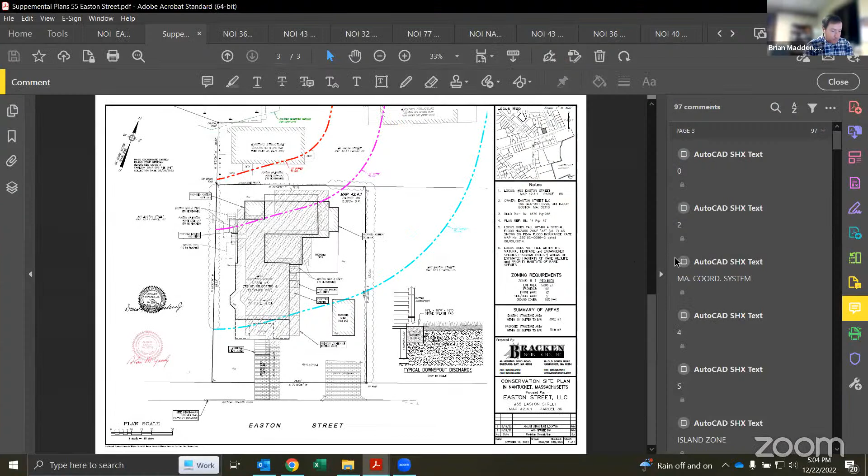We have Easton Street LLC at 55 Easton Street, represented by Brian Madden. Thank you very much, for the record, Brian Madden from LEC. At the last meeting, we discussed the proposed project that involved raising and relocating the existing dwelling with some improvements on the subject parcel located within the flood zone.

There's also that isolated vegetated wetland to the north that's separated from the site itself by an off-site structure, also enclosed with stockade fence and a patio area. We had submitted a photograph just to show what that looks like between the existing deck on site and looking towards the wetland. So pretty heavily developed conditions between the site and the wetland. The wetland itself is occupied by invasive Phragmites, bush honeysuckle, and bittersweet, surrounded by existing development.

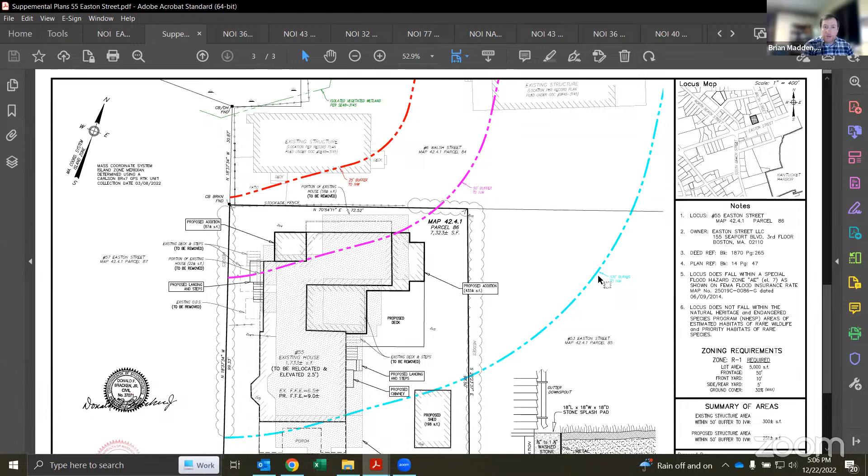But as requested by the commission, we did provide some clarification on the reduction of the structural footprint within the 50-foot buffer. There's a total of 49 square feet being reduced within the 50-foot buffer zone, in addition to an increase in the wetland separation setback to that offsite wetland. So that, coupled with the reconstruction of the dwelling that's going to be elevated in compliance with state and local building codes to improve the flood zone interests, we believe the project will result in an improvement over existing conditions. I'll turn it over to questions. Thank you, Brian.

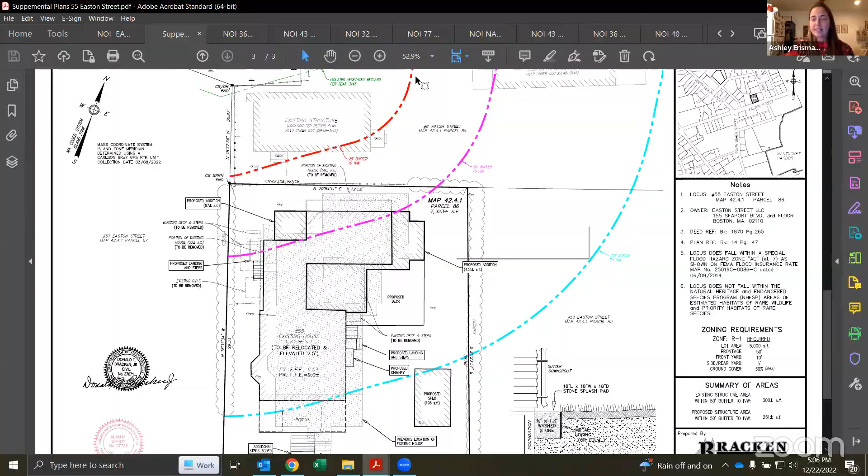Once the screen share's off, I'll hopefully be able to see if any commissioners have questions or comments. So again, any questions or comments? Mark?

Thank you, Ashley. Brian, am I reading it correctly? There's a substantial amount of construction within the 25 to 50-foot buffer? There's existing developed conditions that are off-site, yes.

But you're doing nothing within 25 to 50 feet for new construction? Well, we're shifting the house further away from the wetland within the 50-foot minimally. There's some proposed redevelopment in that outer 50-foot, but that's all previously developed conditions. Again, we're moving the structure further away, closer towards Easton Street, to reduce that structural footprint in the 50.

Well, to be blunt, Brian, you didn't move it far enough away to my liking. Well, again, just to reiterate, there's heavily developed conditions in between the site and the wetland with the existing structure, surrounded by stockade fence and patios.

And I think shifting it closer towards Easton Street, you run into HDC issues, amongst other concerns. But again, I think the project is a vast improvement over existing conditions, from a flood zone perspective, and also increasing the wetland setbacks and structural reduction.

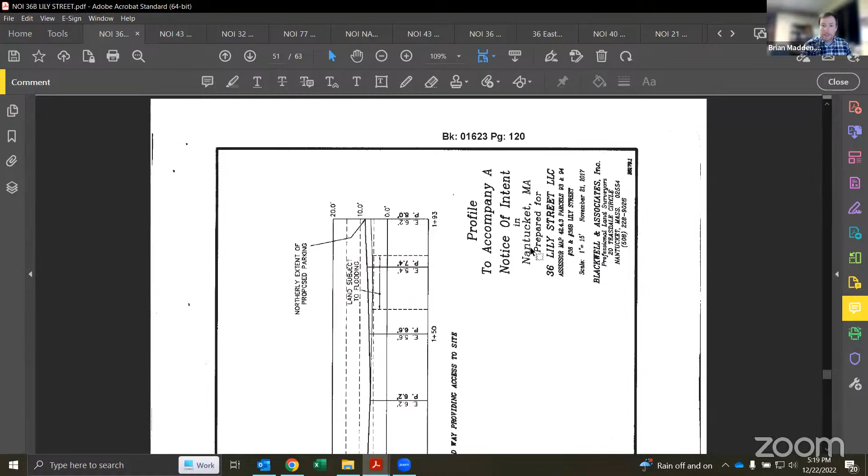I'll let Will pull up the new plan. This is the older original plan. I may have the wrong one up, but give me... I can share my screen if that's easy. Brian, why don't you share your screen if you have it? Yep. All right. Thank you.

All right, everyone see that? Yes, we can see that. All right, excellent. So based on the commissioner feedback we got at the last meeting, we've made several revisions, essentially eliminating the proposed structure within the 50-foot buffer zone to the vegetated wetlands to the west.

That results in a net decrease of 74 square feet of structure that's currently within the 50-foot buffer zone. If you remember, originally we had 121 square feet of structure proposed in the 50, which resulted in a net increase of 47 square feet. So with the revision outside the 50-foot, we have a net decrease of 74 square feet.

The size of the proposed main dwelling has been reduced in total by 202 square feet. We eliminated the gravel surface driveway turnout area that extended into the land subject to flooding. Again, that's a local land subject to flooding, not within a FEMA flood zone. We eliminated the gravel aspect, and per Seth's recommendation, went with reinforced grass instead. So no substantive change there.

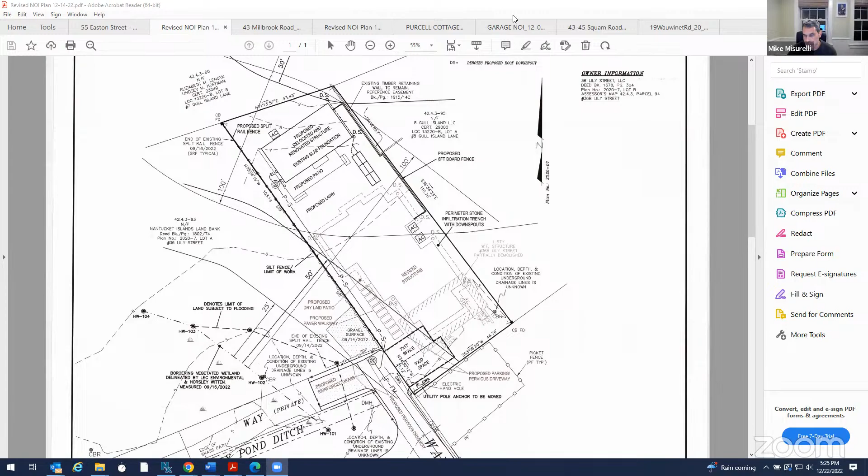Okay, sorry, I recall that now. Does that answer your question, Mike? Yes, thank you. I did something to my Zoom screen, bear with me for a second. No problem, they're tough to navigate. Mark, you had your hand up. I did, thank you, Ashley.

Brian, is there construction within the 50 anywhere on the property? I'm not seeing it on the map. It's a portion of the parking, on-site parking is within the 50, but that's a pervious surface. Okay, thank you for that, I know I'm reading it correctly then.

And tell me this, Brian, what will the access be to the second dwelling in the northwest corner? In terms of post-construction or during construction? A post-construction vehicle or pedestrian or both? There will be no vehicle access, just pedestrian access around the building, the main building.

I guess I'm just troubled by the intense use of the property, but I wish I knew more about the groundwater separation issues. I realize the foundation is already in for the northwest structure, but there's nothing really on the ground except some gravel and wild vegetation where the proposed structure is going. I'm not sure covering that big a piece of real estate will affect the groundwater. Maybe I could get help from some of our more science-oriented members like Ashley.

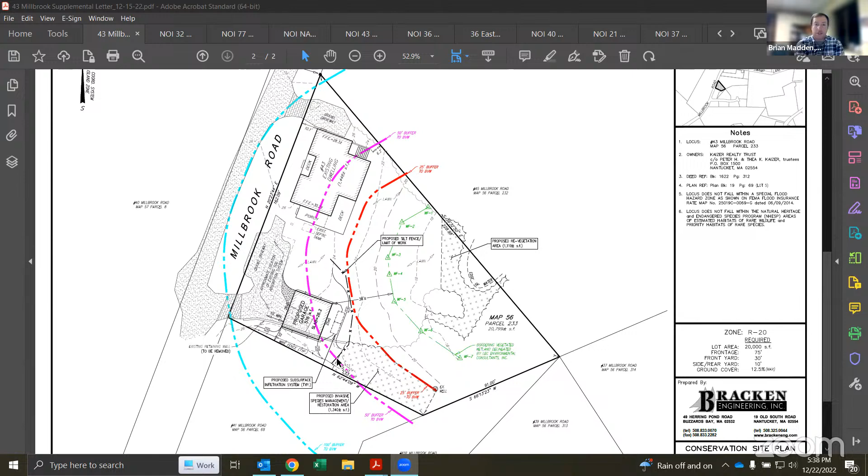So the proposed project is the garage in that location. We reduced the garage size. Initially it was 24 by 28, we reduced it to 24 by 24. It's within the existing gravel parking space, with privet hedge overlapping within the lawn area that's relatively flat.

Intrusion into that 50-foot buffer zone is unavoidable due to the side yard setback, but more importantly, the location of the septic system underneath the existing gravel driveway. Thanks, Will, in that location.

So I know we discussed this a little bit, but just to go over it more: Title V, so the state DEP requires a 10-foot minimum setback for a slab foundation to an existing leach field. And that's not an arbitrary setback, that goes into the functionality of the system. Because engineering-wise, I think the closer you get, it starts to compromise the functionality of the system. So with good reason, that is a technical setback that we are bound to. And DEP is not going to issue waivers to minimize that setback because they can't affirm the functionality of the septic system moving forward.

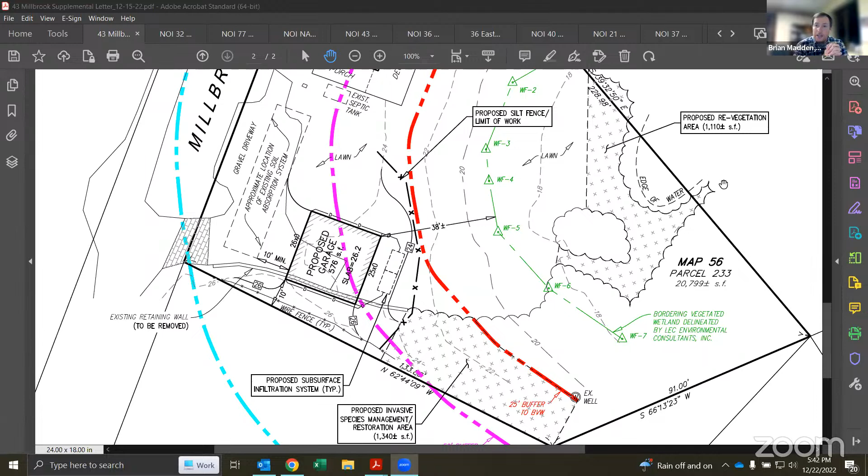Thank you. Thank you. Any other questions or comments from commissioners?

I really appreciate revegetating part of the actual wetland. I am nervous about just seeding it, so we'll probably want survivability-type conditions to make sure that native species actually germinate and survive there. But I'm assuming that is something you guys would be okay with. Yeah, we would expect monitoring to ensure successful establishment. Okay, because I know with seeding, it takes a little bit longer to do that.

All right, if there aren't any other questions or comments from commissioners, we'll open this up for public comment. Do not see any public comment on YouTube at the moment. I also don't see any on the Zoom call. Will, do we have everything we would need to close?

Indeed, we do. Brian, would you like to close? Yes, please. Is there a motion to close? So moved, Madam Chair. Motion made by Linda. I'll give Joe the second. By roll vote: Beal, aye. Erisman, aye. Misurelli, aye. Landowski, aye. Williams, aye. Carries unanimously. Thank you very much.

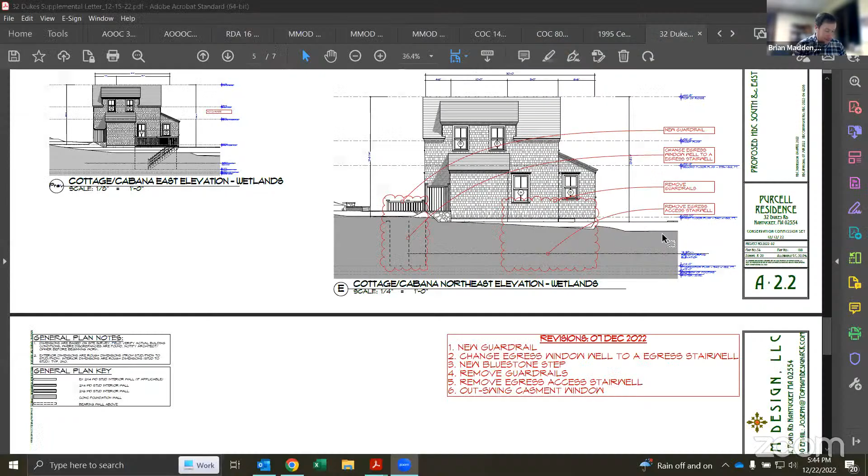So Brian Madden, again, for the record, representing Purcell's. At the last meeting, based off of some comments received by the commission, we revised - or I'll say the architect revised - the proposed cottage to remove the basement access stairwell that was previously within the 50-foot buffer zone to that offsite bordering vegetated wetland.

And additionally, per the request by the commission, we removed a stone retaining wall at the end of the driveway that was also within the 50-foot, and we're substituting that with a row of landscaping. So as currently revised, there's no proposed structures in the 50-foot buffer zone. And hopefully that addresses the commission's concerns.

Thank you, Brian. Any questions or comments from commissioners? I appreciate the changes. It's all Joe Topham.

If there are no questions or comments from commissioners, we'll open it up to the public. So public comment on 32 Dukes Road. Not seeing any comments on YouTube.

Will, do we have everything we would need to close? Yes, we do. Brian, would you like to close? Please. Is there a motion to close? So moved. Mike, I'll give you the motion. Joe, I'll give you the second. So by roll vote: Beal, aye. Erisman, aye. Misurelli, aye. Landowski, aye. That carries with Commissioner Williams recused.

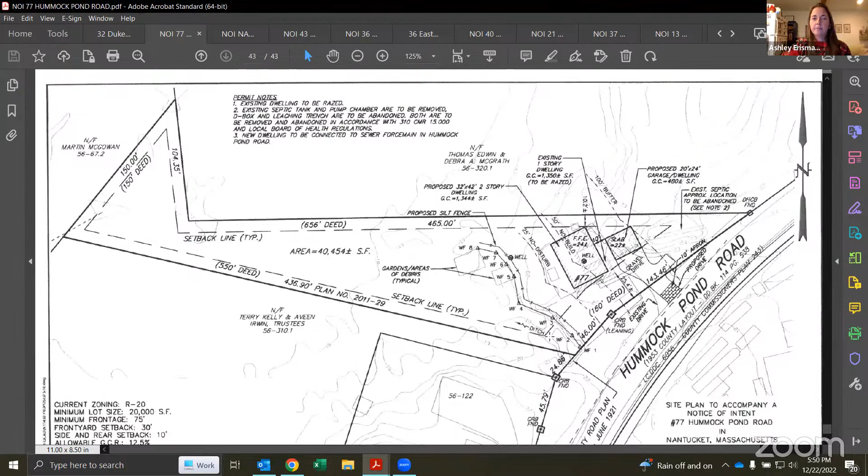Thank you, Madam Chair. Thank you, Paul. It was helpful to go out to the site with Chloe and Finn. The site is quite messy, as we saw, so I think everybody appreciates the cleanup that will happen there.

So my question is on the tear out of the foundation where it is, you'd essentially just be with the overdig at this point, as far as going any, just temporarily. The structure is getting no larger, so the foundation would only represent the overdig into the 50, which would then be backfilled to where it is currently. That is correct. Actually, the footprint will be a little bit smaller because we're removing that one section, about 100 square feet in the 50.

But essentially, it would be a removal of the foundation. It's only a crawl space that's out there now, so we'd be removing the existing crawl and then replacing with a new foundation. In the crawl space, I assume, as Chloe had mentioned, the high groundwater there is what would only allow the crawl space. That's correct, we're not seeking to go beyond that.

That's correct. When you drive into that site, if you notice to the right, there was a mounded area. That's the existing on-site septic system. That's why it's mounded, because of the high groundwater. The good thing here is that since this house was originally constructed, a force main has been run down Hummock Pond Road, and we now have the ability to tie this into sewer. Okay, thank you.

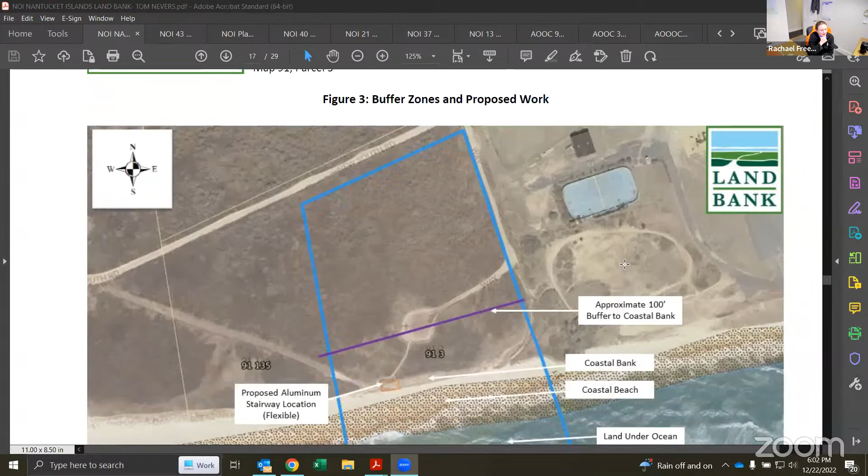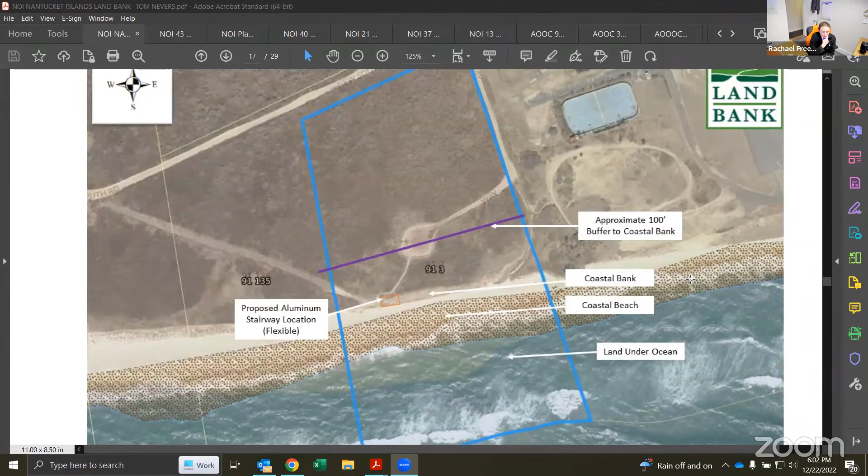That moves us on to Nantucket Islands Land Bank, Tom Nevers, represented by Rachael Freeman. Thank you, Madam Chair. My name is Rachael Freeman. I'm representing the Land Bank this evening with a request to install a set of removable aluminum stairs at the Land Bank property, beach access to the west of the Tom Nevers Fairgrounds. The site contains a coastal beach, a coastal bank, land subject to coastal storm flowage, and land under ocean resource areas. However, this is a water dependent project and a water dependent use.

So to the best of our knowledge, we're not requesting any waivers for this project. We believe there won't be any adverse impacts to bank height, stability, and the use of the bank as a sediment source. If anything, we're hoping this will allow the bank to not continue to degrade under foot traffic and maybe revegetate at some level. So I am happy to answer any questions about the stairs themselves or the application.

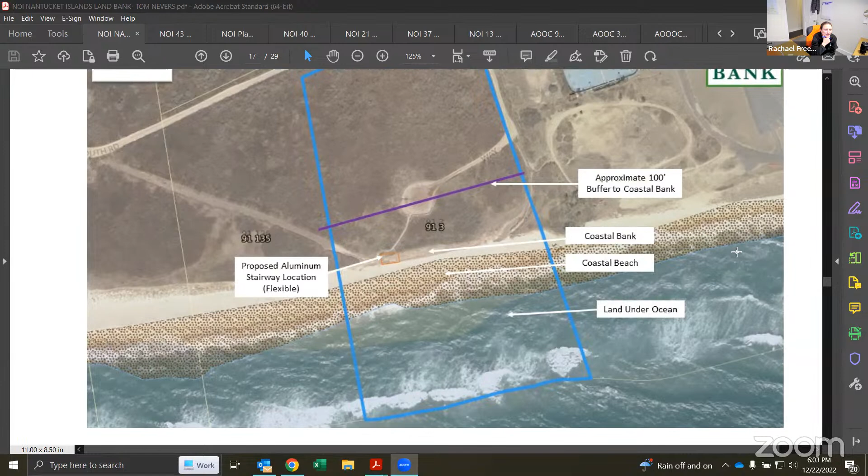Thank you, Rachael. Are there any questions or comments from commissioners? It's pretty straightforward.

I just want to thank you, Rachael, and thank the Land Bank for trying to continue to allow the public to access our beaches and these important wetland resource areas, because without you adding stairs, it would be impossible in so many of these spots. Mark, did I see your hand go up? You took the words out of my mouth.

Okay, Mike. Thank you, Madam Chair. Rachael, I just have a question that might help us in future endeavors with the aluminum stairs. Are those custom made, or do you buy them sort of stock and add on to them?

It's actually an interesting process. We use a company called AlumiDock, and they come in different lengths, like 10-foot, 12-foot, 14-foot lengths. But because we have a number of these - and you're going to hear from me again tonight about more beach stairs - we can trade out different sizes and lengths depending on the site and how it's changed over time. The other thing is if it's too long, you can bury the bottom. So there's ways to manipulate these so that they're usable in different areas depending on the year. That's how we've been doing it at this point.

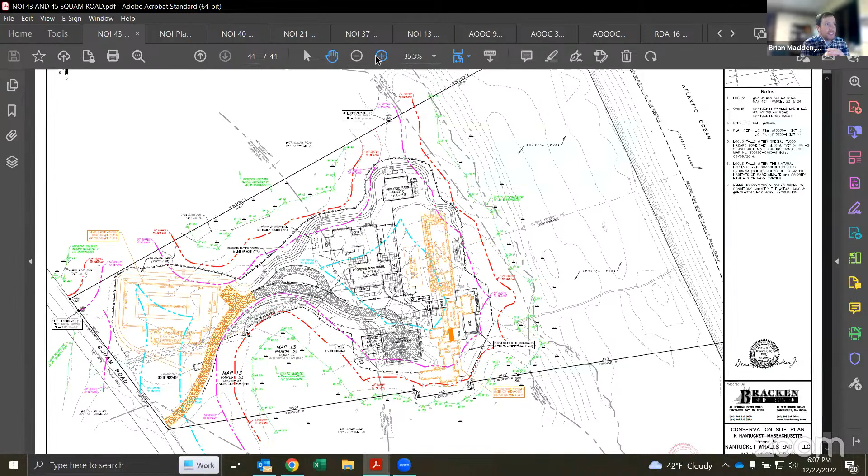Greater than 50% of the area between the 25 and 50 will be maintained. No structures proposed within the 50. All structures will maintain greater than a 2-foot separation to high groundwater. The septic leach field is outside the 100-foot buffer zone, so no waivers are required for this project. It's been designed in compliance with the regulations. We are still waiting on natural heritage, but would appreciate any comments or questions if there are any.

Thank you, Brian. Just to point out, everything you see in orange on this plan is either previously approved or pre-existing. I know there's been a couple recent filings over the last couple of years on this project. Thank you, Brian. Any questions or comments from commissioners?

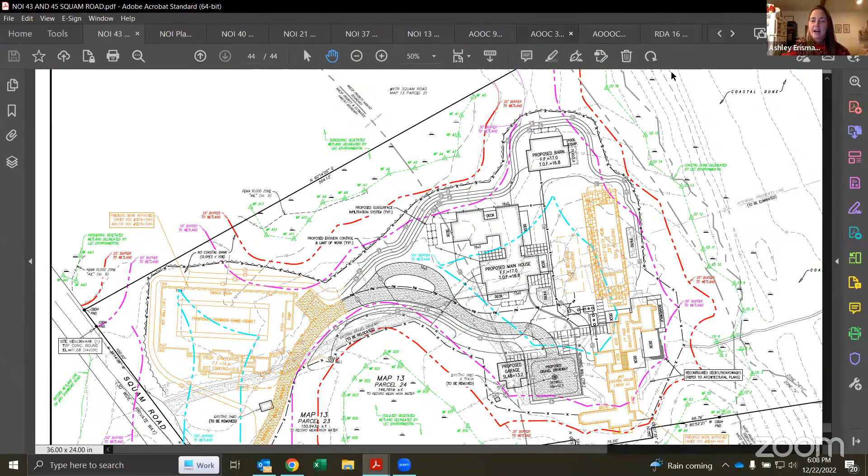I had a question about the barn - is it a real barn holding animals, or is it just being titled a barn? I don't believe it's intended for animals. Okay.

It has gone through HDC. I think I know a portion of this has gone through HDC - I don't know if the entire thing has gone through HDC, but the intent is for there not to be animals in there. Okay, just because there are numerous negative impacts associated with animals that would be held in a barn, so we would not want horse manure or whatever that close to the resource area. Understandable - if I'm misspeaking, I'll certainly correct myself at the next meeting, but I'm pretty sure that's not the intent here.

Okay, because that gave me pause for concern, so thank you for clarifying. No problem. So again, any questions, comments from commissioners? And if not, I'll open it up for public comment on 43 and 45 Squam Road.

So it does appear that we have some public comment on YouTube. Tony Cahill, and I'm not sure, Tony, if you can put your address, that would be helpful for us. But he has three questions.

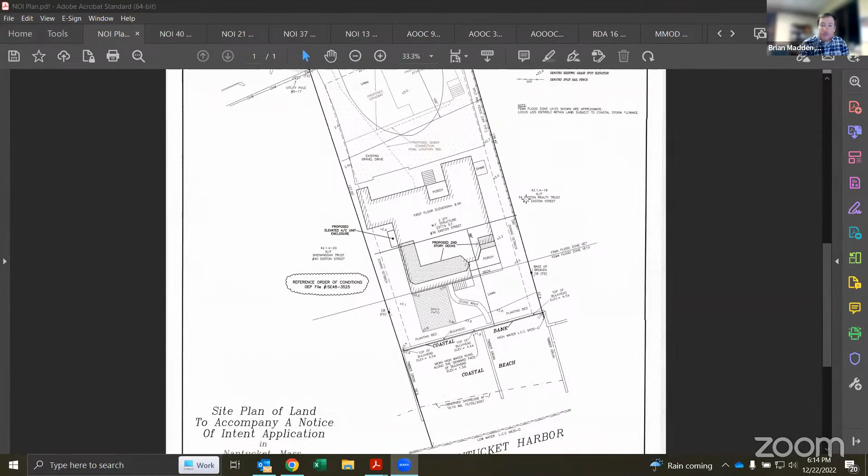Thank you very much. For the record, Brian Madden from LEC. The proposed project involves a garage structure within the northerly portion of the site. There's some living space on the second floor to that. The structure itself is located greater than 100 feet from the harbor, the coastal beach, and the top of the coastal bank.

However, there is the vegetated wetland that's across Easton Street in the parking area along the north side there, so that's the edge of the wetland. The garage is within the 100-foot buffer zone, but is outside the 50-foot buffer zone. The garage is going to be designed on a slab foundation with flood vents in compliance with flood zone standards, to allow water to freely pass through in the event of a storm. And there's some minimal updates, modifications to the driveway, the pervious driveway, for the vehicular access and parking.

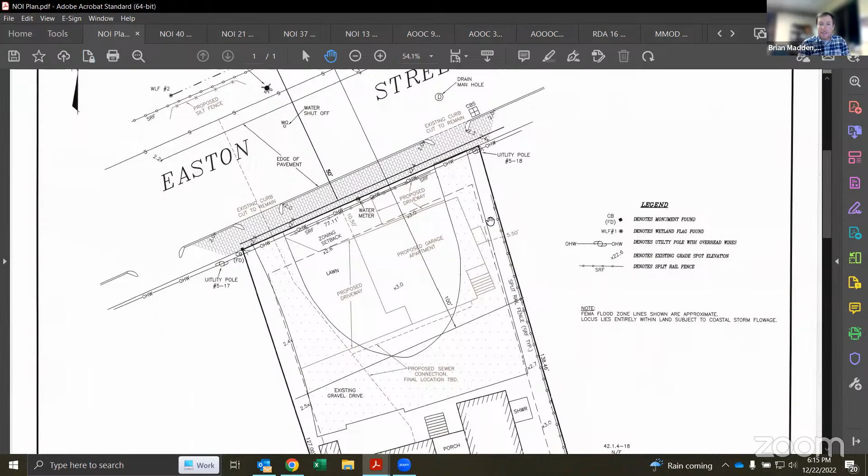With that, I'll turn over to questions. Oh, sorry, let me just - apologies. We did take a look at the groundwater elevation of that vegetated wetland that's kind of tidally influenced, and we are outside of groundwater for the slab foundation, but within the 2-foot separation. So we have requested the waiver for that.

Thank you, Brian. Thank you.

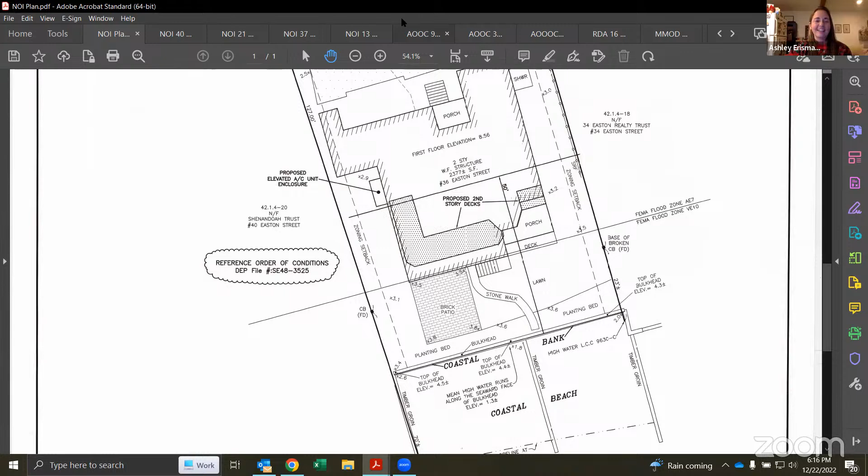I apologize, we didn't have this plan initially in our packet, and I didn't have time to circle back to it. Are you also doing proposed decks on the front of that building on the water side? That had been previously approved under that order of conditions, issued last year. We have the file number right there. Jeff Blackwell had presented that one. Thank you, and sorry, I apologize. Normally I've taken a little bit better look at these, but I just didn't have time to circle back. No problem.

Any questions or comments from commissioners? Looks like no, so we'll open it up for public comment on 36 Easton Street. Does not appear that we have any public comment. Will, do we have everything we would need to close?

Yes, we do. Ryan, would you like to close? Yes, please. Is there a motion to close? So moved, Madam Chair. I'll give it to Mike, I think he beat you with his hand, and I'll give you the second, Linda. By roll vote: Beal, aye. Erisman, aye. Misurelli, aye. Landowski, aye. Williams, aye. That carries unanimously.

Thank you, thank you, Brian. And that moves us on to Nantucket Island's Land Bank at 40 Western Avenue, represented by Rachael Freeman.

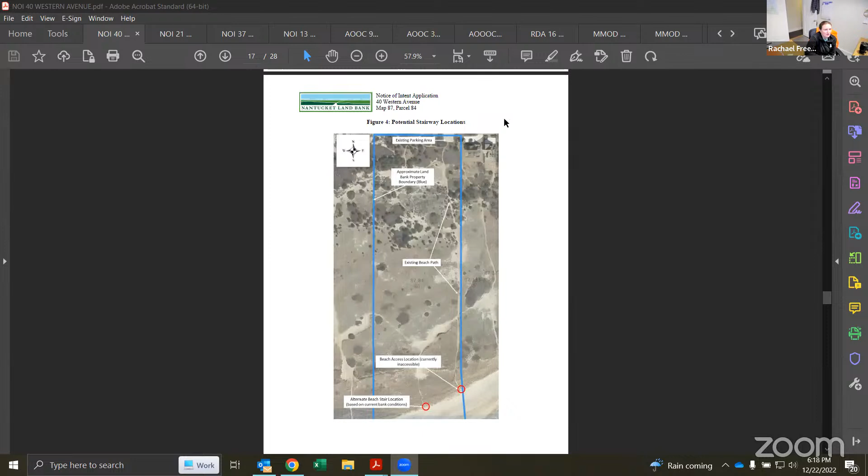Thank you again, Madam Chair. My name is Rachael Freeman, and I'm representing the Land Bank with another request for beach stairs. We have had pretty heavy erosion on some of our South Shore properties, and this is a classic example. This property is at 40 Western Ave, and as you can see in the picture that Will is putting up, there is a dune or dune field resource area, as well as a coastal bank. At the northern end, there's a very small parking area.

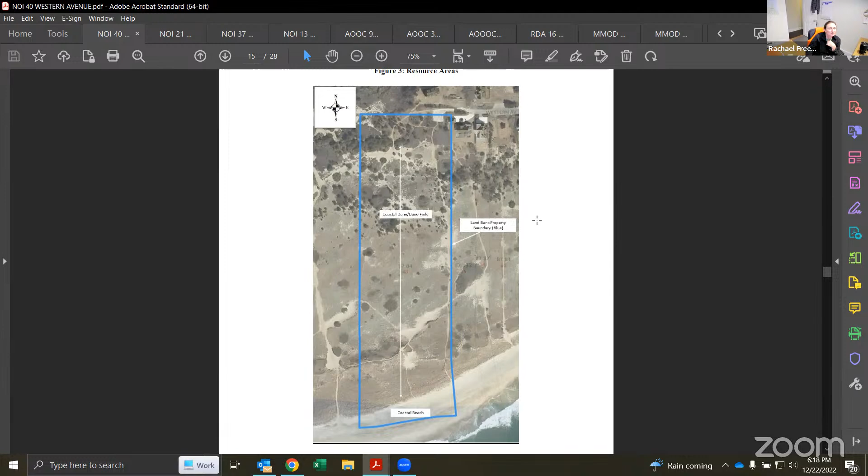This has been frequently used by people seeking off-the-beaten-track beaches. What we found this summer was when our access point became too eroded, the public using it would cross over onto private property to access the beach. So we are proposing to put in another set of aluminum beach stairs in this location. The most commonly used access is actually to the east, but at this time, the best location to put the stairs is slightly further west, where we happen to have another existing trail.

We're proposing to put the stairs in there this winter. Similar to our last application, we're asking for some flexibility in that we're not necessarily going to be installing new paths, but we might bounce back and forth between these two paths trying to find the best fit year to year, because we do tend to change out stairs. We pull them during storms and large wind events, so whatever the bank looks like when we come back is what we're trying to fit to. I'm happy to answer any questions specific to the site or our aluminum stair installations.

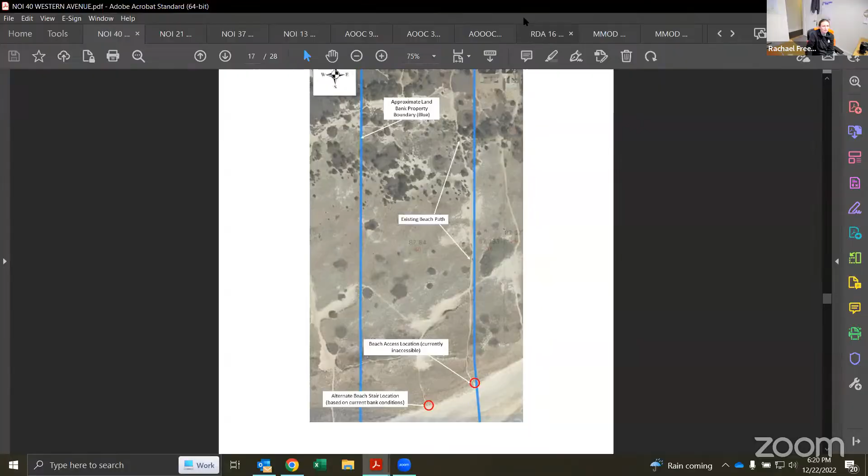Thank you, Rachael. Mike, I see your hand up. Thank you, Madam Chair, thank you, Rachel. My question is, do you ever put up signage? That site looks pretty vast. Is there any signage that would direct people to the stairs so they're not trouncing through the dunes? I don't even know if that's possible, but...

That dune field is interesting in that there are pretty well-defined trails, but we do actually have signage out there now that tells people you cannot access the beach through that one trail, where basically at this point you'd go over the cliff. So when it becomes an unusable trail and it's no longer an effective beach access, we do generally sign it.

We have not necessarily tried to restrict people to individual trails in that area because what we're seeing is people tend to be pretty consistent in their patterning. And it's not a hugely highly used area, but there is more than one trail.

Okay, great. I think that if they can't get down, it's just wise to point them in that direction, and you're already way ahead of it. So thank you. Mike, I appreciate that question because I was going to ask the same thing. I'm familiar with these beaches because I park my bike right up the street.

But people do deviate from that trail. So probably having a sign just pointing them to the second trail, because people do jump right off the edge, and they were kind of doing it all summer.

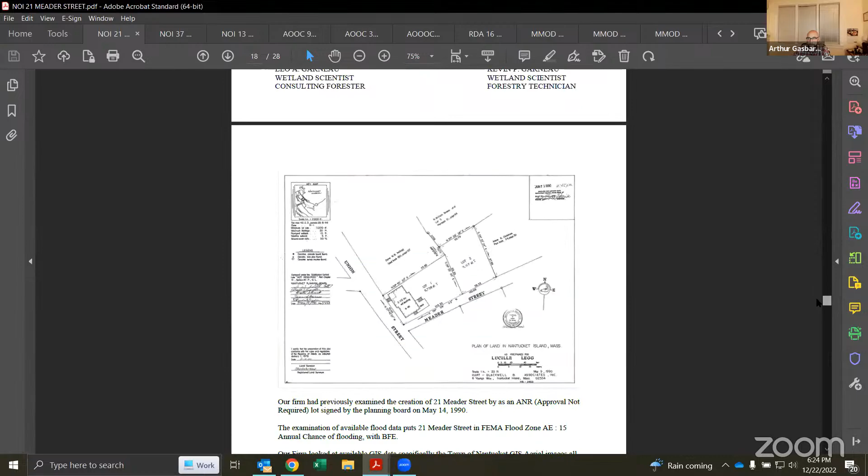The plan on the screen right now is actually for the adjacent parcel. If you were to scroll up, two more, keep going if you would please. Yeah, there you go, that's the plan.

And so what we've done is there was an enforcement order issued for work done within land subject to coastal storm flowage without permitting. The owner had never even heard of land subject to coastal storm flowage, didn't know anything about it requiring permits. And so all work has stopped.

He had installed landscape timbers around the perimeter. The surrounding properties had been pumping water or letting water flow onto this property, so the idea was to stop the flow of that water. He had hoped to raise the grade to the top of the timbers, but I've explained that the performance standard for land subject to coastal storm flowage doesn't allow the raising of the grade.

So in fact, what we are proposing is simply to restore the grade to match the surrounding grades. And we've put spot elevations, as you can see on the plan, around the grades on the properties around the outsides of the timbers, and that's what would be matched.

We'd like to maintain the timber essentially as a curb, sticking up and exposed, just to not have the surface water from rainstorms or people that have sump pumps and that sort of thing continue to flow onto this property, understanding that grade can't be increased from what it previously was.

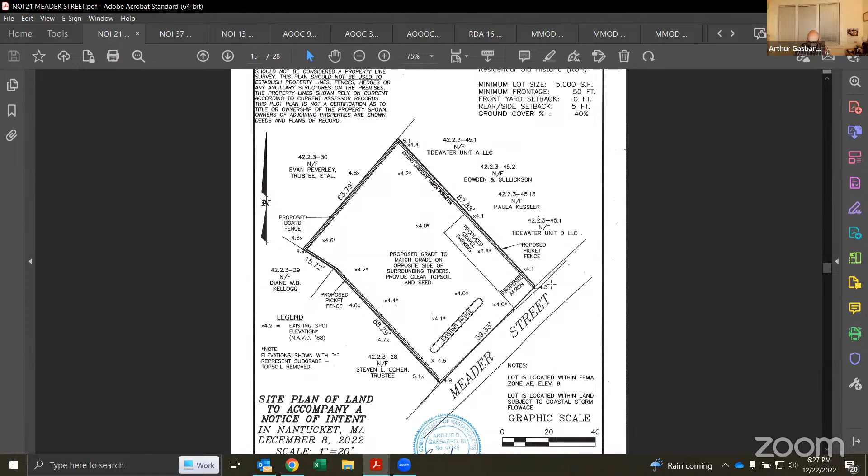Oh, one other thing, if I may, Madam Chair. We also included orders of conditions, or the site plan that you had up, from just 2022 earlier this year for an adjacent property that also didn't show any vegetated wetland on this property, as well as a certificate of compliance on the opposite side of the property. This plan is from 2022, done by Mr. Santos, and our property, our locus, is referred to as the Legg property. Again, no vegetated wetlands shown on that property, and all of the work currently approved on this property is not shown in any kind of buffer zone to that.

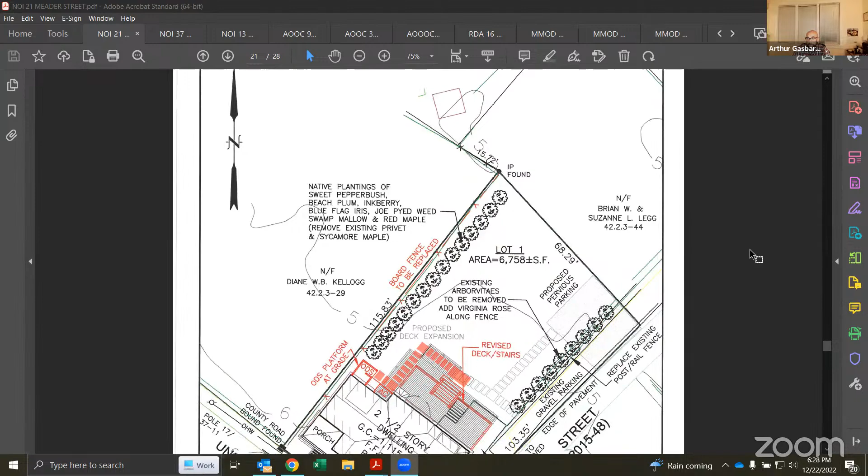And then if you could continue to scroll down, please. Here you have the locus just to the left-hand side, to the west of that building, Building D. The claim in the opposition letter was that wetland went right up to that building. Those buildings, that site, was essentially completely razed to the ground around 2015 and completely rebuilt, all with a certificate of compliance issued, with no notation or depiction that there was a wetland where they say there was, right next door. It's not shown on this plan either, to further support that.

So I know some of the current commissioners are involved in this application, and certainly the one for the previous plan. I think you had a bit of a topographically low area where a lot of water started flooding down in there, but I don't believe, based on the investigations we've done, that it met the criteria of a wetland, and clearly the commission didn't for either of these two applications. Thank you.

Thank you, Art. Are there any questions or comments from commissioners?

I just had a question, Art. This had been up before us, and then was it pulled because we had a change in commission? I'm just trying to remember the history here. No, we pulled it so that we could engage a professional wetland scientist to provide information to the commission in response to what came up. We wanted to make sure we got somebody credentialed for the record. Okay, thank you for explaining that again.

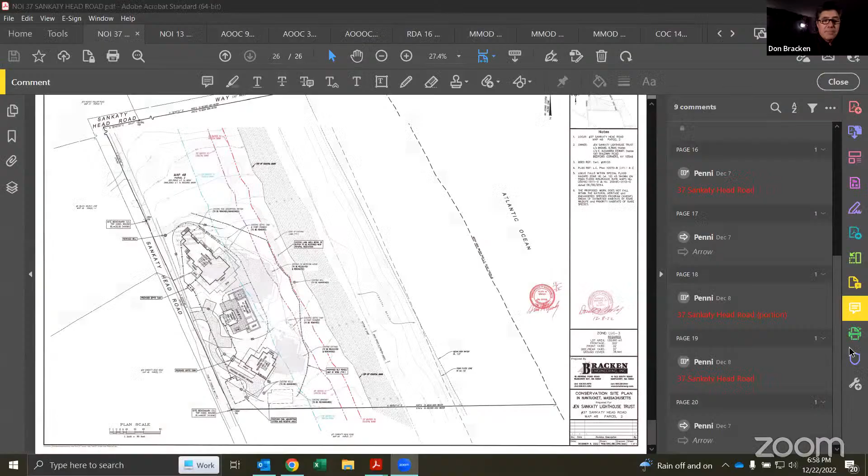This is a 6.5 acre lot on the east side of Sankaty Head Road. Currently, there's about 200 feet between the roadway and the top of where the coastal bank is. Coastal bank is the only resource area affecting the proposed project. Obviously, there's natural heritage area and coastal beach further to the east that we're not within the buffer zone for. So on the plan, we've shown the 25, 50, and 100-foot buffer zones.

You can see shaded, the large shaded areas represent the existing dwelling and decks and porches, and same with the cottage. They're located about 40 feet or so from the top of the coastal bank. We're moving both of them about 50 feet further toward the road, getting the entire cottage structure outside of the 100-foot buffer. In the main house, the foundation will be outside the 100-foot buffer, but there will be a section of porch and deck still within the 100-foot buffer.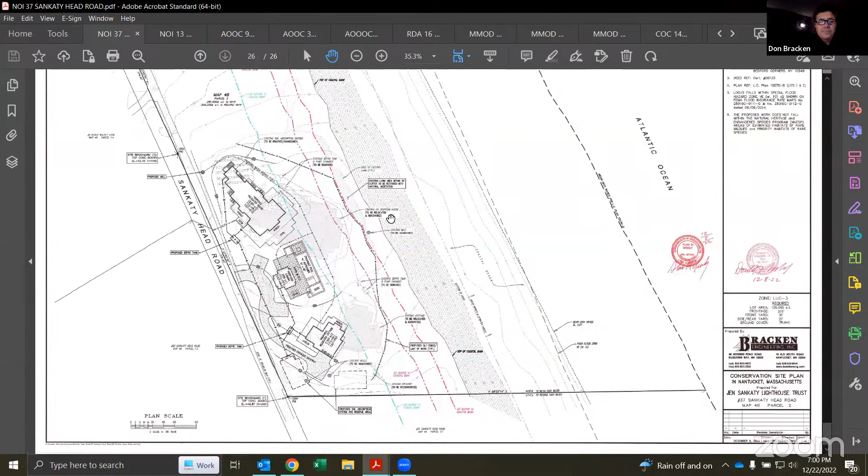Also proposed as part of the project is to relocate the existing well, which is close to the top of the coastal bank right now. We're going to move that to the northwest by the road. The existing leaching facility is already outside the 100-foot buffer, but there are tanks, pump chambers, and pipes within the 100-foot buffer and some within the 50-foot buffer that will also be removed as part of the project.

There'll be a new driveway, pool, and cabana proposed that is also outside of the 100-foot buffer. The existing footprints of those structures will be backfilled with the material taken out for the new excavations, and the existing topsoil and subsoil will be retained on site to be used to cover those areas and revegetate them. There is an existing section of lawn area within the 25-foot buffer that is proposed to be restored and naturally vegetated in that area.

There'll be erosion control at the limit of the work. However, most of the site does slope away from the top of the coastal bank, so there'll be really very little chance of any erosion toward the resource area. And with that, I'd be happy to answer any questions.

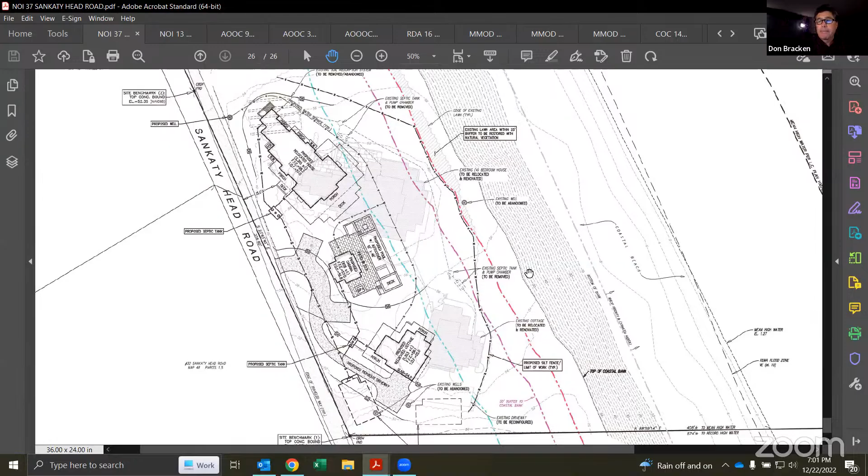Thank you, Don. Always appreciate when structures are moving away from these eroding banks. I'm sure it was in the application, but I don't remember - do you know what the erosion rate is at this property? I do not, we did not calculate that as part of the application. Okay, you're moving away from it, but I was just curious.

Any questions or comments from commissioners? If not, we'll open it up for public comment.

Do not see any public comment. Will, do we have everything we need to close? Yes, we do. Don, would you like to close? Yes, please. Is there a motion to close?

So moved, Madam Chair. I think Joe beat you with his hand. I saw that, he's been trying all night, so I'm going to give it to him. And I'll give you the second, Linda.

By roll vote: Beale, aye. Erisman, aye. Misurelli, aye. Landowski, aye. Williams, aye. All right, that carries unanimously. Thank you.

And that moves us to Huckleberry Friend Trust at 13 and 17 East Tristram Avenue, represented by Art Gasbarro.

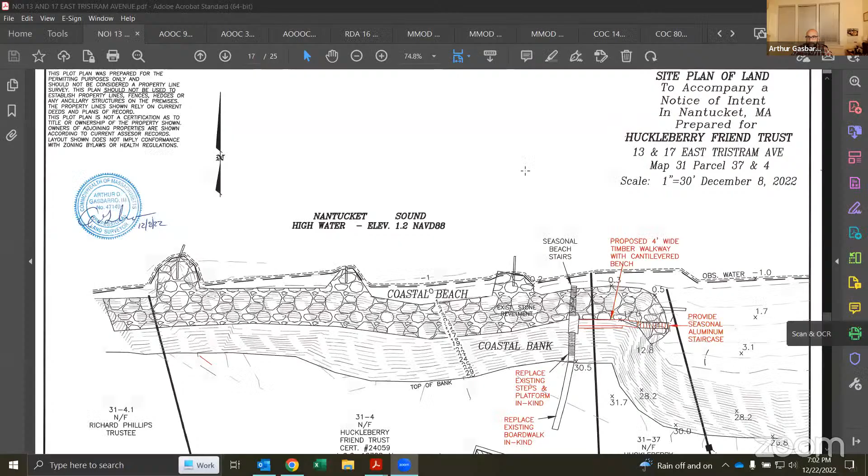Thank you, Madam Chair. I'm before you tonight with an application related to a set of beach stairs. The applicant has an existing boardwalk that approaches beach stairs down to a timber platform and down to a seasonal set of stairs over the stone revetment. They would like to add a platform, timber walkway, with another set of seasonal staircase over the revetment that would get them down to the eastern side of their property. That's what we've shown in red on the plan. The existing stairs would be reconstructed in kind. They're aging a bit, and along the platform or walkway, he would like to have a bench.

We understand the concerns with the coastal bank and minimizing that footprint, so that bench would be cantilevered off the frame of the walkway to minimize its size, but just to have a nice place to sit down there. There's a natural plateaued area right on top of the existing stone revetment. Again, the staircase over the revetment would be seasonal and aluminum, similar to what's been approved for the land bank on earlier applications, an Alumidoc type staircase. Thank you, Art.

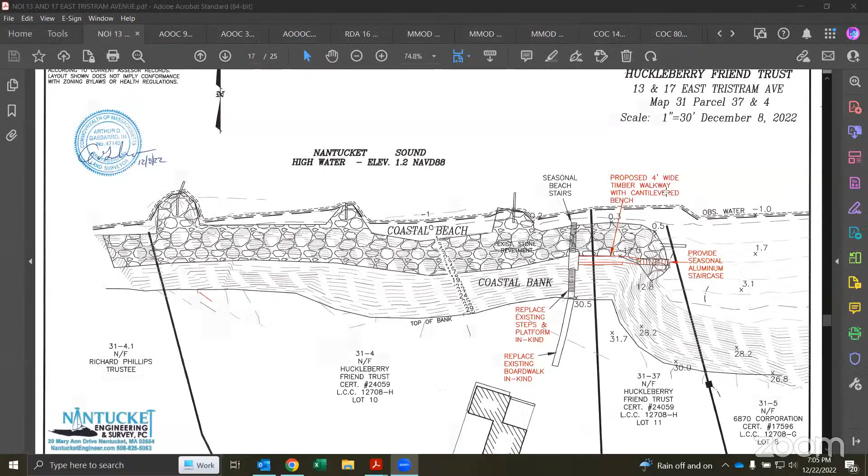Understood. I don't know if any commissioners have any comments or questions. Linda, can you put the map back up again? As Ashley said, I'm familiar with this property and familiar with most of the stairs along that whole bluff. A lot of them do have an intermediary bench area halfway down the bluff. How long is this set of stairs?

Through you, Madam Chair, the staircase itself would be about 14 feet long and the walkway is about 22 feet long. The bench would only be about the same, 12 feet or so, it wouldn't go the whole way, because where the bank starts to take an angle, you can see where I have the small rectangle to show it. I didn't want to go the whole way. I went out and surveyed, you might not be able to see it to scale, but it's going to take a slight angle or cant in that walkway, so where the staircase is, it would make the most sense to build with the least amount of disturbance. So the bench would only go about 12 feet or so, just a single, open plank type of seat, a bench.

But the bench is how long in length? Through you, Madam Chair, the bench itself is about 12 feet long. I agree with Ashley that I think that's excessive. The benches I'm familiar with, halfway down the stairs, are small, maybe 6 foot by 6 foot, just a small bench built into the stair length. A 12-foot long bench, I think that's excessive, in my opinion. So I don't know if you want to come up with a different scheme to get a bench somewhere in there.

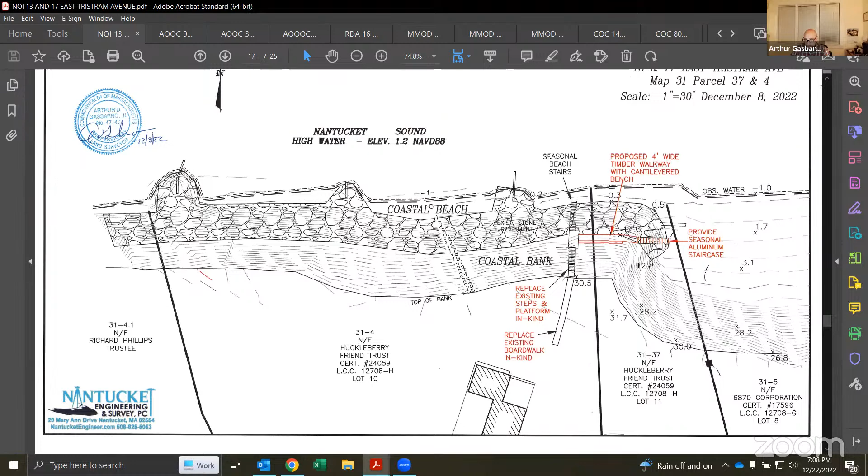Thank you, Linda. Mark, I see your hand up. There's an existing stairway now on the west side, am I correct? If I may, Madam Chair, there's an existing staircase that goes straight down. There's not another staircase on the property. Well, I'm saying it goes straight where that big scouring is going on - there's already a staircase there, isn't there? No, that little rectangle shape you see on the plan is a remnant of a timber groin on the west side. There's no staircase on the east side. Oh, on the west side, those are timber groins that jut out of the stone revetment.

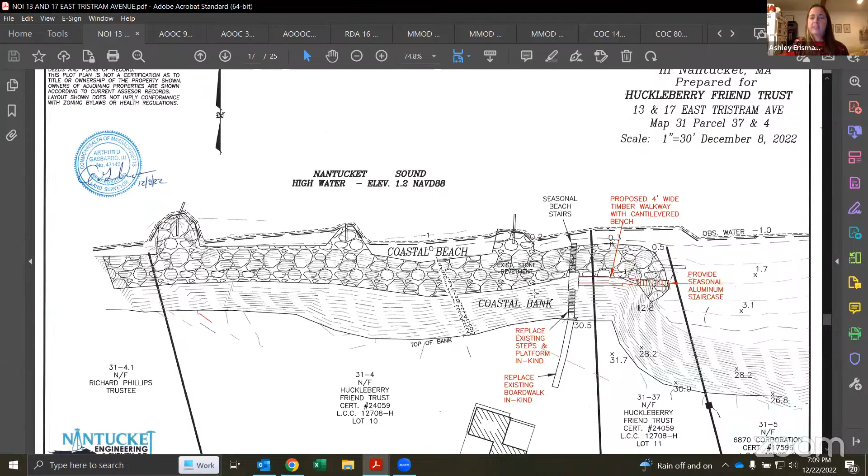I'm looking at a platform with something - I'm looking at Google Earth and it shows a platform with what looks like a staircase going down, north to south. Yeah, that's what's shown on the plan, on the east side of this property. Oh, that would be on the next property over, perhaps. But this property only has one set of stairs. The next property over is the one that had the fire recently. And this is two properties together, Mark - is that maybe why it's confusing on Google Earth? Oh, that could be, yeah. Anyway, 17, 13, and 17.

So there'll be two staircases going down, or are you going to remove one and keep one off of the existing platform? So we would just keep the one that runs to the north, and that one's seasonal as well. And then we would have one that runs to the east. So you need two - well, one would be to keep what we have, and one would be, the bottom of which is underwater on a lot of tides. But sometimes it's not. Interesting.

Yeah, I think probably one access is more appropriate. That's where I was going, actually. I don't think we need two, particularly down into an area where the public can't go, but on the beach at any kind of high tide, and the seasonal one going straight out into the sound - it looks like it already exists, but we don't need two for sure. And no bench.

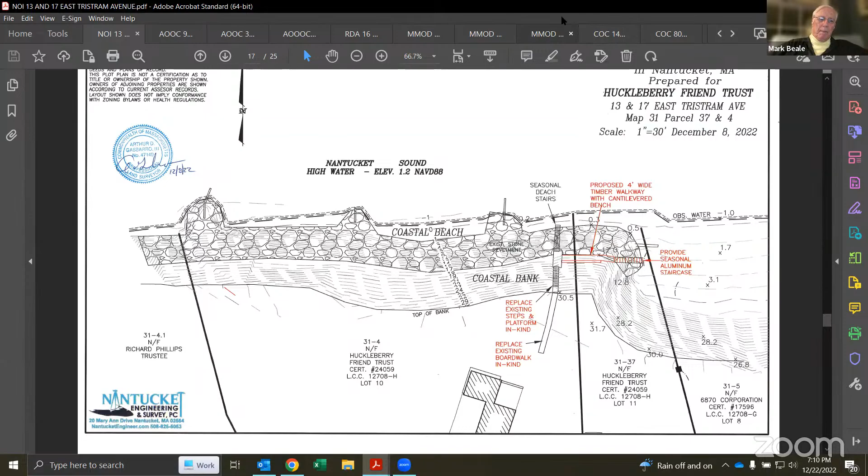Great, thank you Mark. Any other commissioners' comments or questions? If not, we'll open it up for public comment. I do not see any public comment on YouTube or on Zoom right now. Art, what would you like to do with some of the concerns?

If we could continue to the 5th, please Madam Chair, I'll have a look at this and see what we can come up with. I think we will maybe come back with a reduced size bench - I heard you say no bench, and maybe we could see how that goes. I know it was a really important element - the client actually started off wanting a bench with enclosed storage underneath it, and I didn't think that would be acceptable. I thought a cantilever design might work, but maybe if we get it down to just having a small place to rest, limited, then we want to show that to the commission. We'll see what we can come up with.

All right, well thank you Art. So this will continue until January 5th.

Thank you. And then Will, I had a question - on our original agenda we had 3 Baltimore Ave, and on the new agenda it was not listed. Is it supposed to be on tonight? That is for next week's meeting. I'm not sure how that snuck into that first submission. Okay, I just wanted to double check that we weren't missing something.

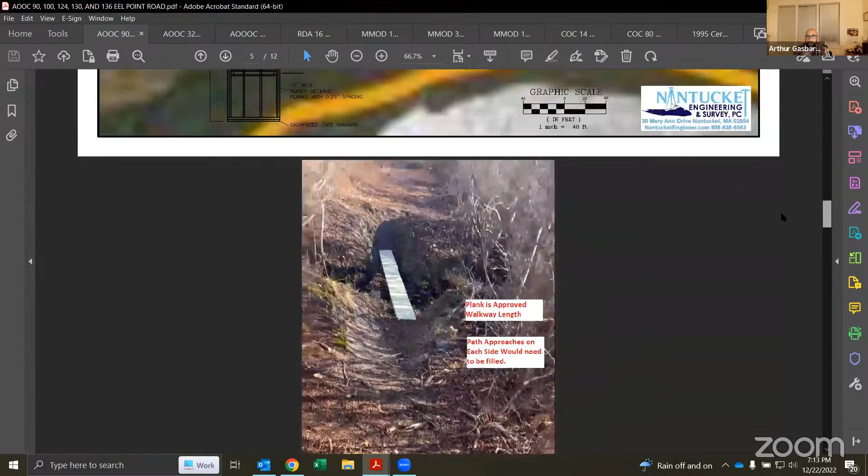It became evident once we cleared the approved path where it was going to go, that there are some areas where there's natural overland flow that heads down. I thought this photo might help explain the situation.

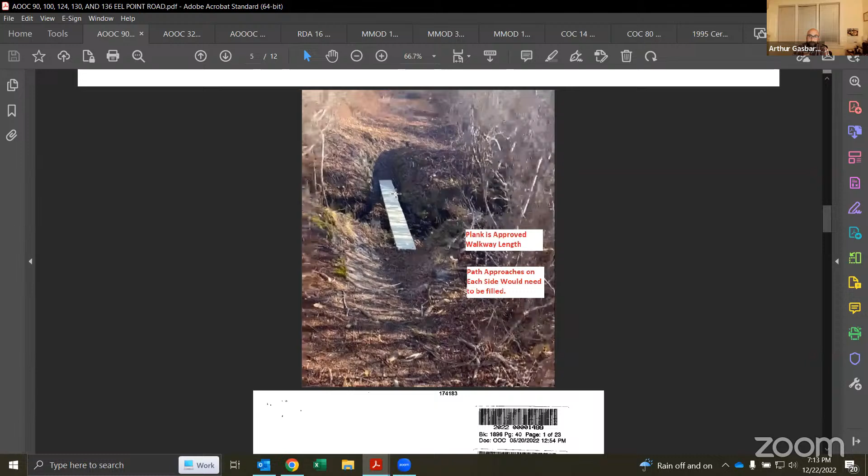Our preference would be to not fill that area in order to make the approach to the approved walkway length. Instead, we'd extend the walkway and leave the natural grade the way that it exists, traversing across the existing ground.

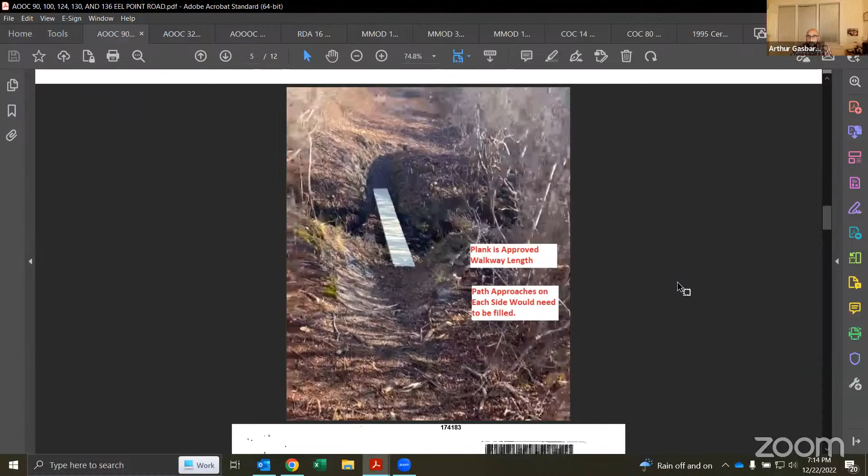So what we were proposing would be a longer elevated walkway that would essentially start and stop where the grade changes happen on both sides, and then we're able to leave the natural grade alone. Any surface water that naturally drained to that ditch would continue to go, and everything would keep functioning the way that it currently does, which we believe would be more in keeping with protection of those interests.

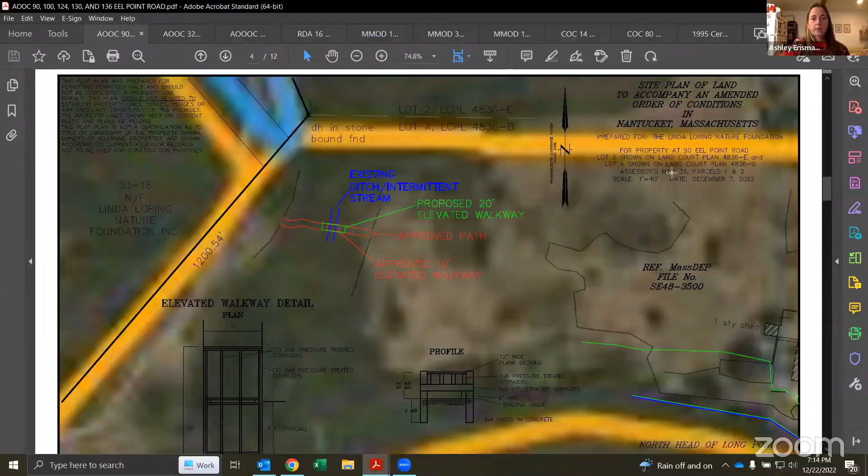So I agree. When I was reading the amendment, I wasn't quite sure what you were looking for, and then I saw the photo and I thought, okay, loud and clear. So that was very helpful. Are there any questions or comments from commissioners? See if there are any questions from the public. Looks like not. Will, have you guys been out to the site?

Yes, last week, and the reality is the same as the photo. Okay, so you think we have everything to issue an amended order? Absolutely.

Okay, Art, would you like us to issue tonight? Yes, please. Is there a motion to issue the amended order? So moved, Madam Chair. Motion made by Linda, seconded by Joe. By roll vote: Beale, aye. Erisman, aye. Misurelli, aye. Landowski, aye. Williams, aye. That carries unanimously.

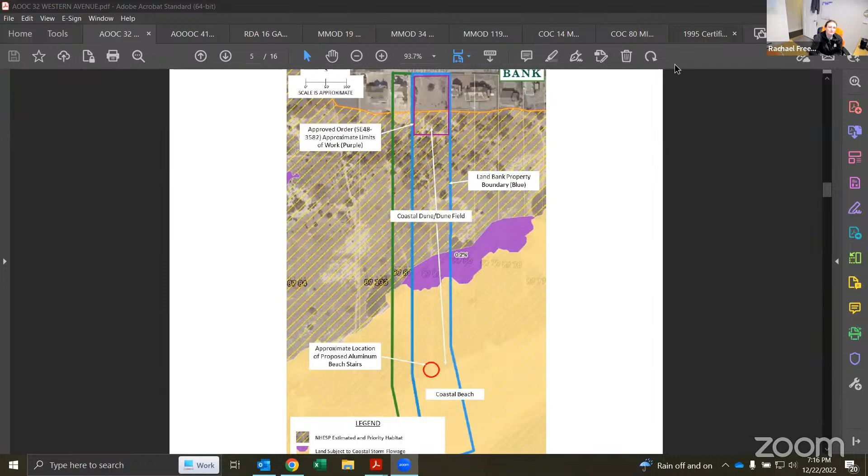Thank you, Rachael. Linda, I see your hand up. This is just a general question because I've worked with clients where we've had aluminum stairs that we're supposed to pull up in the wintertime. These stairs that we've approved tonight, are we going to approve this one as well for the land bank? Are they pulled up also, and where do they go when they get pulled up? Because just the act of pulling them up can be pretty intense on the land underneath it.

Yeah, we have multiple people in our field crew involved in that process because they can be heavy, and it depends on the site as to where they go. They can get stored at our shop, or in an adjacent parking area. It just really depends on the property. Through you, Madam Chair, how damaging is it to pull them up over something that's not stable in the first place?

It isn't that damaging to pull them up because what's interesting is the most impactful part is probably the platform on the top. The stairs themselves aren't actually leaning against the bank, and so generally, with enough people, you don't usually have any sort of impact on the bank. It's more installing the platform on top that would actually be the most impactful.

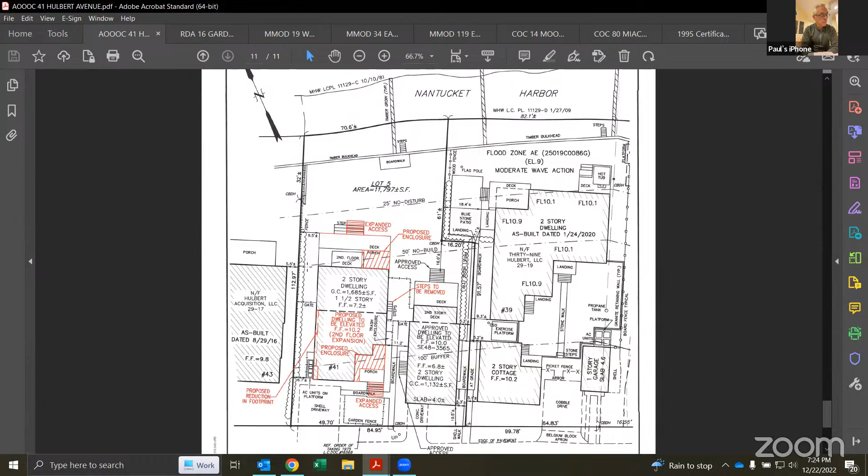So we'd be looking to enclose a portion of the existing porch—approximately 55 square feet would occur within the existing no-build, although that's already within area that's already existing, part of the existing structure. The plan sets forth all of the proposed improvements in red, and that's the extent of the application.

Happy to answer any questions that you may have. Thank you, Paul. Any questions or comments from commissioners?

I have one. Paul, normally I'm completely understanding of expanded access steps when we're bringing structures into flood compliance. This one though, the expanded access steps on the harbor side—it seemed to me like there might be a way to put those within that first floor deck so you don't need to extend them, like I've seen before, steps that are kind of within the deck. I just feel like there could be a little work done there so they're not encroaching into the 50.

Okay, what we did in that case, Ashley, was we actually reduced the width of the steps. So if you'll notice, the size of the steps that are there now are a lot wider. Will, if you could bring that plan back up.

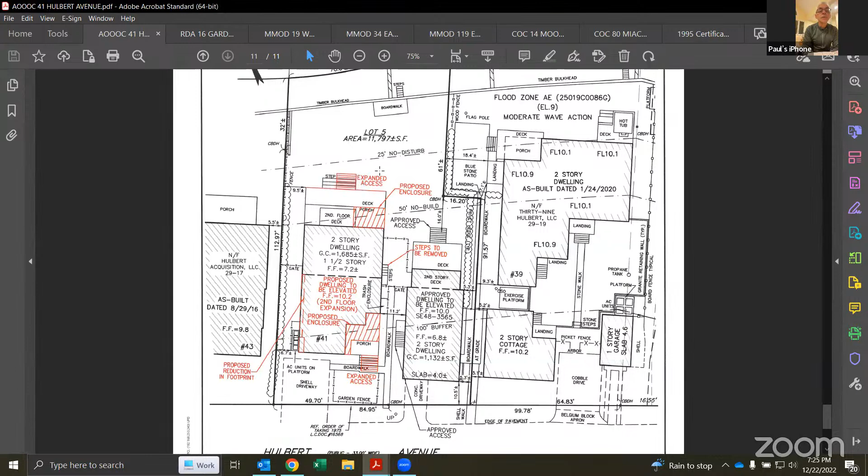And if you look at that back area, you'll notice the steps. They went that whole length and now it's like half length. What was there, why we extended, we then reduced. So that was the intent there along that back area.

Thank you for clarifying, I think I missed some of that overlap in the step. Yeah, so that's helpful. Very helpful. Retract my question. Okay.

All right, if there are no questions or comments from the commission, it does not look like we have any public comment on this one.

Will, has staff been out to the site? Yes. Okay, and we have everything to issue an amended order? Yes, we do. Perfect. Paul, would you like us to issue?

Yes, thank you. Is there a motion to issue? So moved, Madam Chair. Motion made by Linda. I'll give Mike the second.

By roll vote: Beale, aye. Erisman, aye. Misurelli, aye. Landowski, aye. Williams, aye. That carries unanimously.

Thank you. That moves us on to requests for determination of applicability. We have 16 Gardner Road LLC at 16 Gardner Road, and we have Art Gasbarro on for this one.

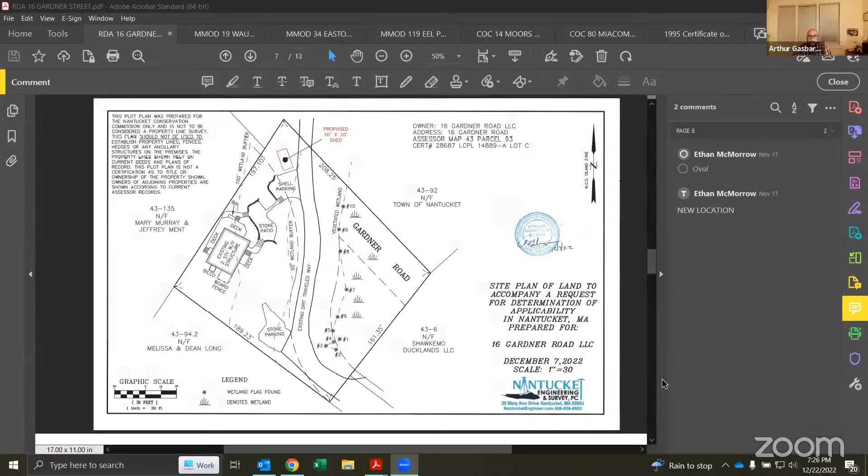Thank you, Madam Chair. I'm before the commission tonight with an RDA for a proposed shed within the 100-foot buffer zone to a bordering vegetated wetland. The shed would be outside of the 50-foot buffer zone and on the opposite side of an existing dirt road. I believe there would be no adverse impact on the interests protected by the commission, but as it's a jurisdictional area, we'll be happy to answer any questions or concerns you might have.

Thank you, Art. Are there any questions or comments from commissioners? Looks like no. Will, what would staff recommend here?

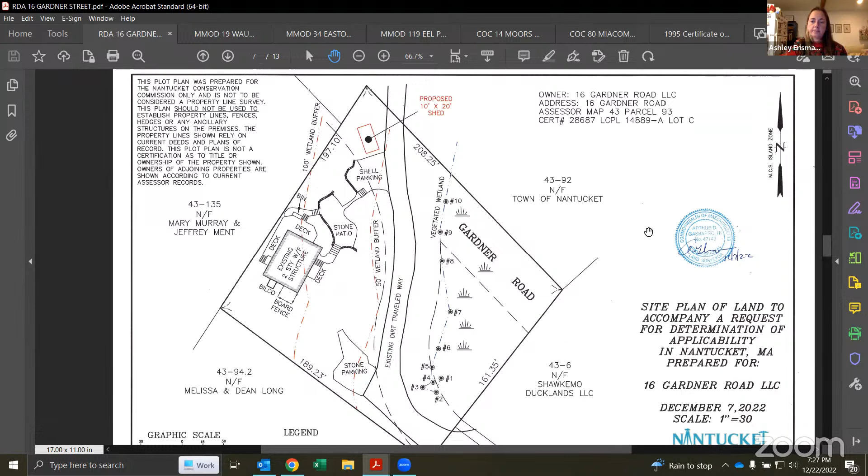Sorry, mute difficulties. I was out there earlier this week. I think that given the intersection of Gardner Road between where the resource area and the proposed shed is, it does not appear that there would be much of an adverse impact or additional adverse impact to the wetland.

And I apologize, I don't have those numbers in front of me. What numbers should we be issuing out for this one to allow for the work without a permit? I also don't have that in front of me, but that can be found. All right, that's what we have to make the motion about, and I just don't have that in front of me.

Unfortunately, we haven't done RDAs in a little while, so I'm not as fresh on those numbers as I normally am. I may need a minute or two to find that. I don't know if it makes sense if we can continue to the next thing and come back. I don't know if that's a possibility or not.

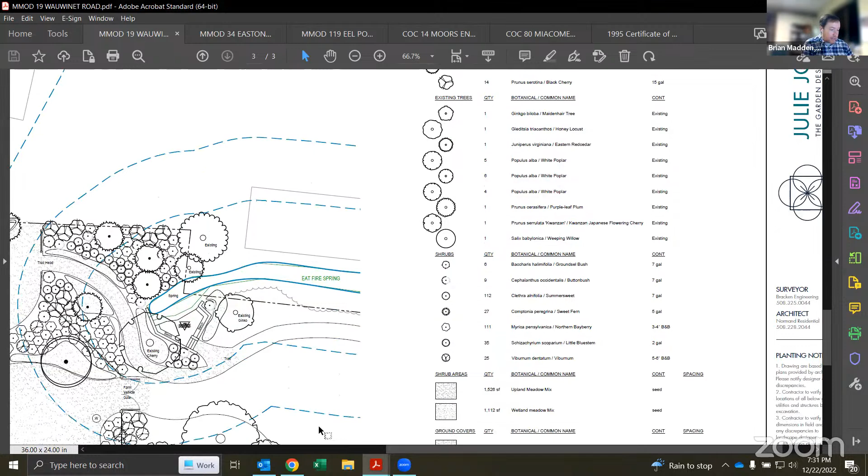At that point in time, we had mentioned that we would be coming back to you for updates on landscaping details, and that's what we're here for. This plan depicts in more detail the native revegetation areas. We have a palette of Nantucket native shrubs that we're proposing throughout the property. We've spec'd out locations for ADA compliant paths and sitting areas with reinforced grass surfaces. We provide more definition on the patio sitting area, in addition to pervious parking areas. Some of those are outside the 100-foot buffer zone, but this represents the overall improvements planned for the site.

I don't know if Rachel has anything else to add at this point. No, I think that sounds great, Brian. I don't have anything right now, but if there are any questions that come up, I am happy to answer. Thank you. Any questions or comments from commissioners?

Mike? Thank you, Madam Chair. Forgive me, I found that plan to be a little bit confusing. Where, what are the blue lines in there, Brian? Those are the dashed dotted lines. Yes, those are the buffer zones to either bordering vegetated wetlands or bank to Eat Fire Spring.

Okay, Will, could you put that back up just quickly, please? Or Brian, I don't know who had it up. If you remember, Eat Fire Spring, looking at the east, that right-hand corner where it's labeled Eat Fire Spring, it goes into a culvert head wall system further to the west. It's flowing towards Polpis Harbor. It goes through a series of culverts and then some open aired sections.

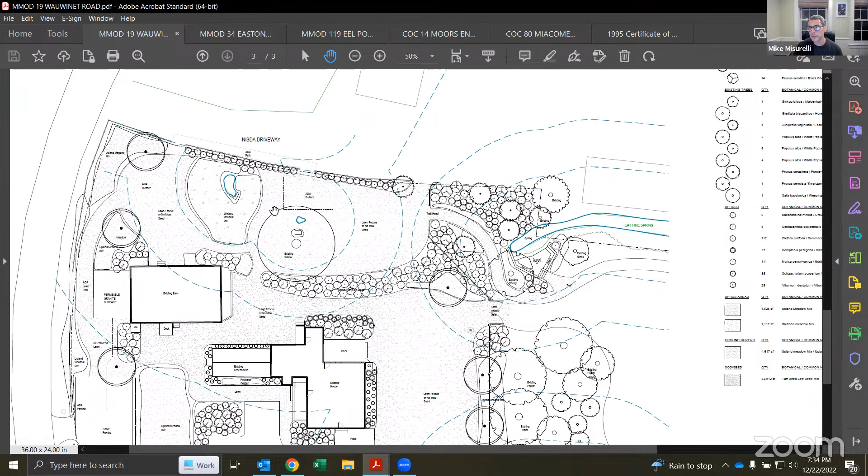No problem. Thank you. I had a question regarding the pollinator garden, which is actually quite small, but just about the species that might be used there. Because I know in my garden, I have some great pollinator plants, but they are aggressive seeders and have managed to escape. So I want to make sure we don't have non-native species that might try and spread out of there.

Yeah, that would be the intent. And Rachel, I don't know if you have any specifics in mind at this point, or that's going to be selected a little bit further down the road.

We don't have specific plant listings at this point. I am happy to come back with a list for your review if that's something you'd be interested in. I definitely agree that some species in pollinator gardens can be quite aggressive, and we would be looking to avoid those. We'd be looking to stick to native species as well.

Okay, perfect. That makes me more confident. Thank you.

If there aren't any other questions or comments, Will, do we have everything we would need to issue the minor mod? Yes, I'm assuming you'd like us to issue the minor mod tonight.

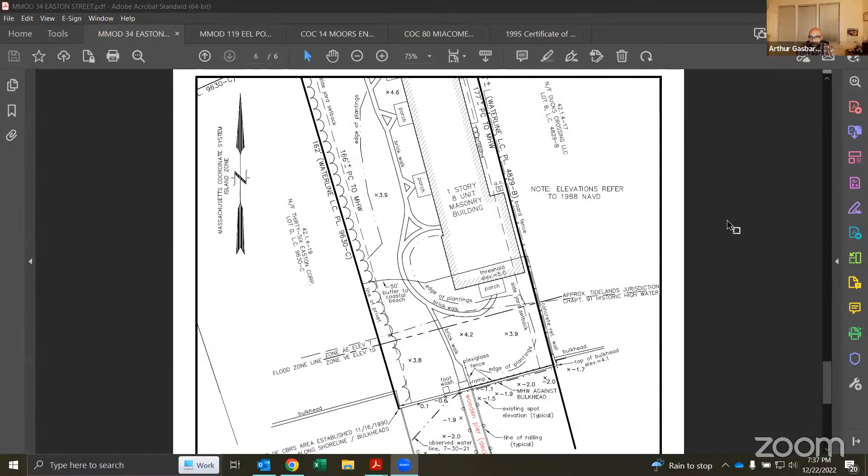Thank you, Madam Chair. Before you tonight is, I believe, a positive modification, and that is to increase the height of the pier that was approved to be rebuilt. There's a little bit of ambiguity in the Chapter 91 license, and what was constructed is a little bit lower than what the license allowed. This was some years ago. We're under a current order of conditions to replace that pier essentially in kind, and believe that, with good planning for the future and coastal resiliency, sea level rise, that sort of thing, it would be a smart decision to raise that pier up about a foot to where it was actually licensed to be constructed.

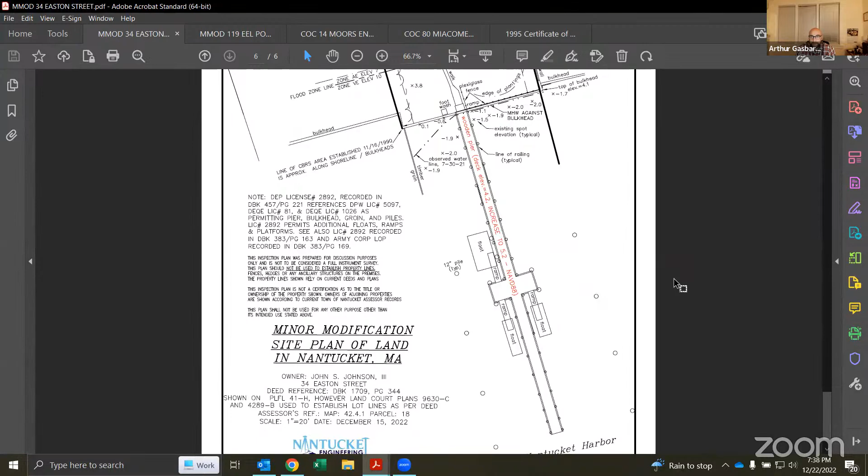I believe that's ultimately positive to all the interests protected by the commission, less shading, and no adverse effect as a result of that. I'd be happy to address questions that you might have. Thank you, Art. Are there any questions or comments from commissioners?

Mike: Thank you, Madam Chair. Art, just a question, how do they raise it? Do they just lift the boards or the structure of the underlying joists? Madam Chair, it's being rebuilt completely, so new piles are going in. So it's essentially a replacement, which is what the current order allows. In the reframing of it, we'll just set a benchmark down there for the contractor, and that will be the elevation. They'll set the boards, and then the cross members for the joists to rest on those piles. Okay, thank you for that. No problem, that's a good question.

Any other questions or comments? Will, have you guys been out to the site to look at it? Yes, indeed. And we do have everything we would need to close. Okay, perfect. Is there a motion to issue the minor mod?

So moved, Madam Chair. Motion made by Linda, seconded by Joe. So by roll vote: Beale, aye. Erisman, aye. Misurelli, aye. Landowski, aye. Williams, aye. That carries unanimously.

Thank you. Thank you, Art. And that moves us on to EPR RGH LLC at 119 Eel Point Road, represented by Paul Santos.

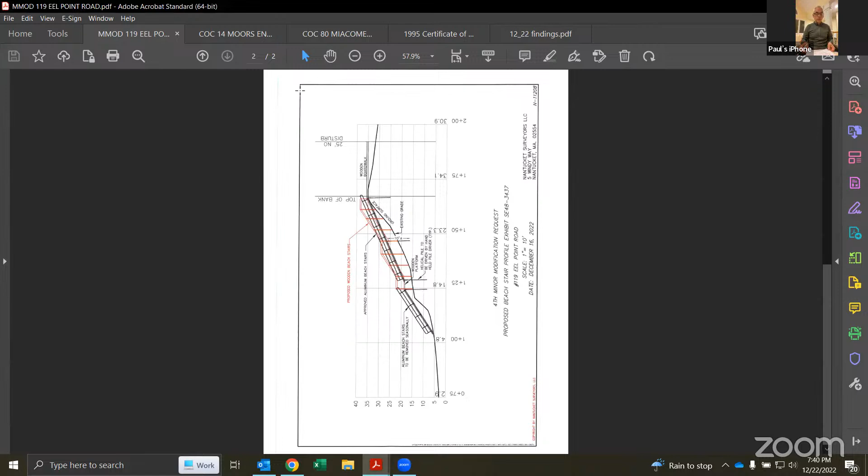Thank you, Paul Santos with Nantucket Surveyors on behalf of the property owner and applicant, EPR RGH LLC. This is a minor modification request regarding beach stairs. This is a stairway that was approved by the commission. There is an existing order of conditions for the property. You'll see in dark or black on your plan, this is a set of beach stairs that was approved with a wooden boardwalk, a section of aluminum stairs to a platform, and then another section of aluminum stairs, which would be the seasonally removable section of beach stairs.

The issue became that the initial section of stairs from the top of the bank to the platform, which held the removable stairs, would basically take up two 20-foot sections of aluminum stairs, and it was quite a significant run. So the decision was made to leave in place the platform with the removable seasonal stairs, but construct a conventional standard wooden access way, which would mean a standard level top area, a drop to another level area, and the stairs down to the platform. So it would eliminate that straight run of over 40-something feet in a straight line down to the lower platform. It's the same location on the site.

Essentially, it's still a set of stairs. We are just seeking approval to use a set of conventional wooden beach stairs in the interior section prior to getting to the lower section of the coastal beach. Happy to answer any questions that you may have. The property is 119 Eel Point Road.

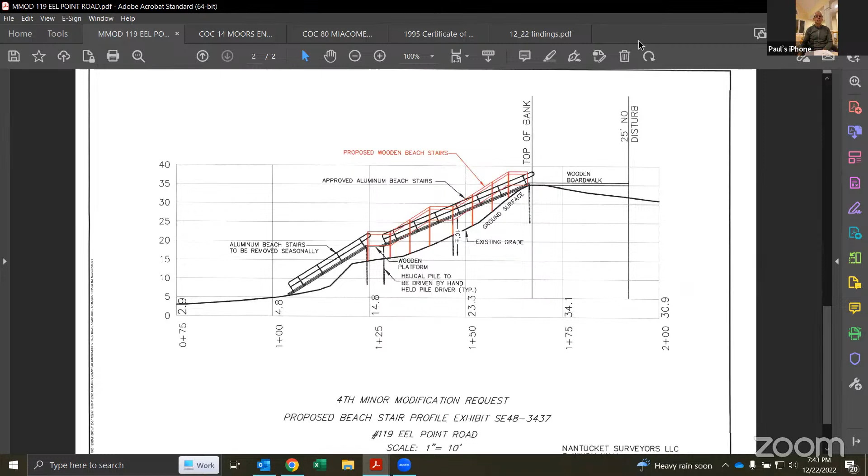Thank you, Paul. Now you have me curious if that's like some weird loophole in there with the stairs needing a platform. But are there any questions or comments from commissioners? Joe: The comment, when I first saw it, I looked at the wooden stairs and then the aluminum stairs, and I wondered, why in the world is it that way? Why isn't it all aluminum? But I think that was explained. Thank you, Joe.

Will, have you guys been out to the site, and do we have everything we'd need to issue a minor mod? Yes, and yes.

So if there are no other questions or comments, would somebody like to make a motion to issue the minor mod? Motion made by Mark, seconded by Joe. So by roll vote: Beal, Aye. Arisman, Aye. Misurelli, Aye. Landowski, Aye. Williams, Aye. All right, that carries unanimously.

Thank you, Paul. And that moves us on to certificates of compliance. We have Acciser at 14 Moores End Lane. I know we have Art Gasbarro on, but I don't know if he wants to go through it or Will.

I'm happy to just quickly address, I believe the project is completed in substantial compliance. And I'm happy to defer to staff or address any questions that may come up. Thank you, Art.

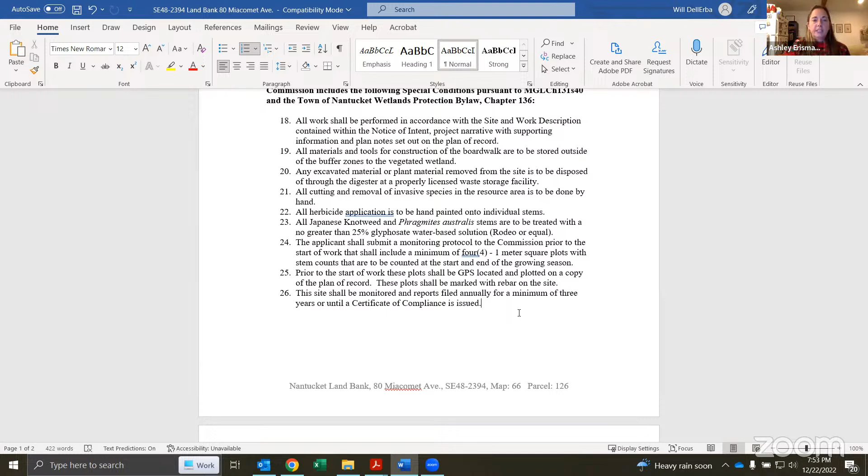So Will, when you stop screen sharing, I know there's a lot of moving pieces right now, then I'll be able to see my agenda. So, 80 Miacomet Ave, we'll continue until January 5th, and we'll have the ongoing conditions ready for you. Thank you, Rachael, thank you.

And then it looks like we have D Martino at 2 Gully Road, formerly 1 Ocean Avenue. This is just a reissue, so we need to make a motion to reissue. So moved, Madam Chair. Motion made by Linda, seconded by Mike. So by roll vote: Beale, aye. Erisman, aye. Misurelli, aye. Landowski, aye. Williams, aye. All right, that carries unanimously.

And that moves us on to orders of conditions, and Will emailed these out to us earlier today. Yeah, we only have 1, 2, 3, 4, 6. Kaiser Realty at 43, Purcell, 32 Dukes, trustees of Eel Point, 30 Easton, and we closed, I thought, the Tom Nevers Land Bank too. Yeah, there might should be - 7.

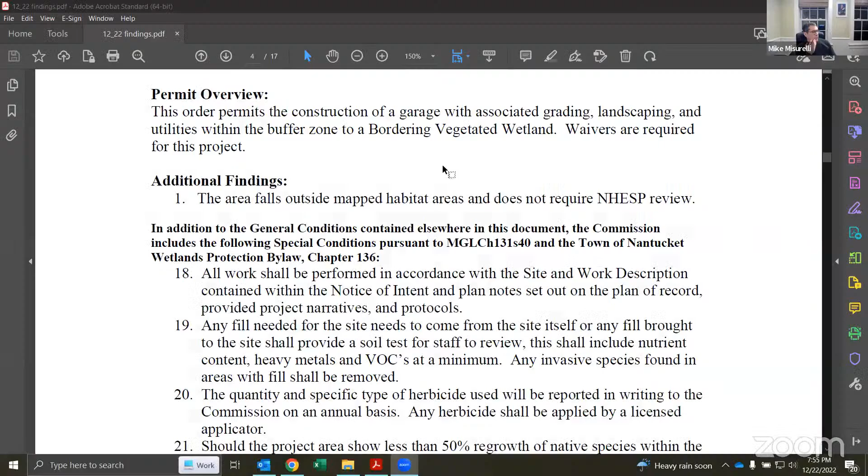So we can go through - we're gonna start, because we didn't close 55 Easton or 36B Lily, we're gonna start on page 4 of what Will sent out, which is Kaiser Realty Trust at 43 Millbrook Road. Can everybody pull that up on their own, or would they rather Will screen share? I have my own, there we go. We'll do it all, okay, do it all.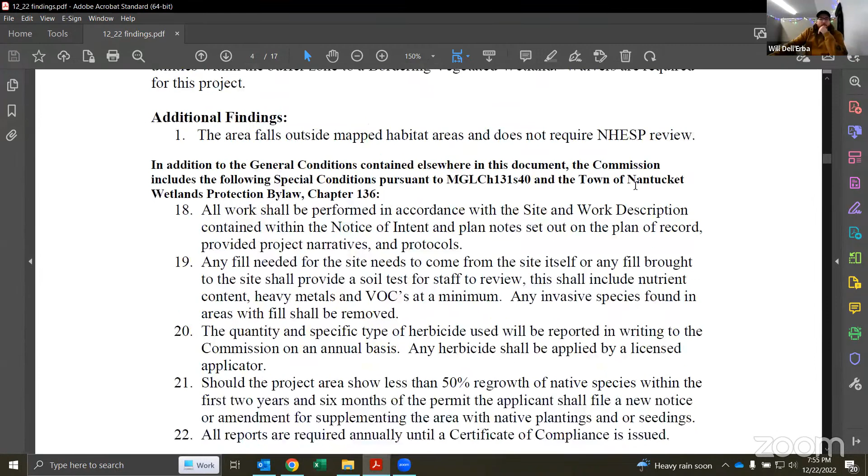All right, so Will, do you want to just kind of go through what you've written up there for us? Sure. So for 43 Millbrook, we have 18, 19, and then condition 20: quantity and specific type of herbicide used will be reported in writing to the commission on an annual basis. Any herbicide should be applied by a licensed applicator. Condition 21: should the project area show less than 50% regrowth within the first 2 years and 6 months of the permit, the applicant shall file a new notice or amendment for supplementing the area with native plantings or seedings. And 22, all reports are required annually until a COC is issued.

So you all have done a lot more of these than I have. Just on the herbicide question, it says the quantity and specific type of herbicide used will be reported in writing - do we specify the water-based solution of glyphosate? I think I saw that in the land bank. Yeah, we do sometimes specify the treatment method, because this would essentially allow for like a broadcast spray. Right, in a lot of these situations we'd want a cut and drip. Maybe in this case...

We have a condition that the applicant come back to us with their proposal for the herbicide treatment, because they didn't really propose a clear treatment, and I think that might cover our bases there and allow us to approve the methodology that they determine they need to use. Is that something the commissioners would like? I think it would be sensible. Yeah.

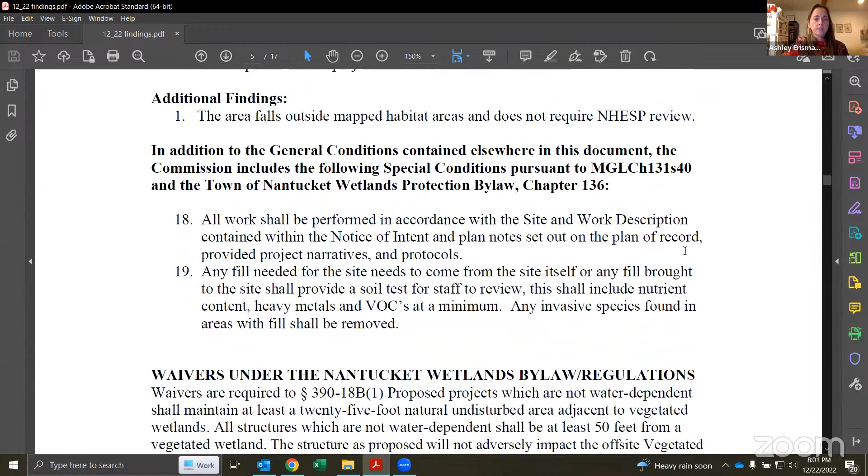That was pretty simple. Yep, pretty simple. This has conditions 18 and 19, and condition 19 needs to be updated as well. This is a function of copy and paste. I have a new master list that has the correct conditions, but there's some holdovers happening. That'll go away, I swear.

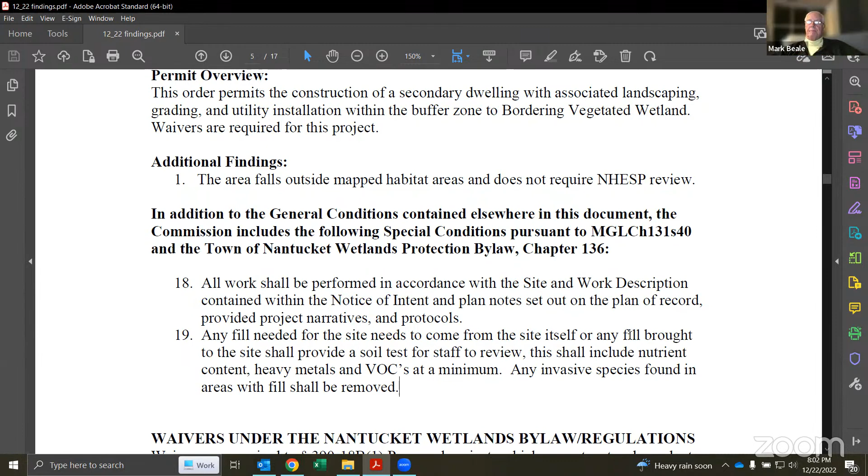All right, does anybody have any questions, comments, amendments? And if not, would somebody like to make a motion to issue, I guess, as amended, because we're updating 19? Yep, so moved, Madam Chair. Linda made the motion, I'll give Joe the second. So by roll vote: Beale, aye. Erisman, aye. Misurelli, aye. Landowski, aye. Williams, aye. All right, that carries unanimously.

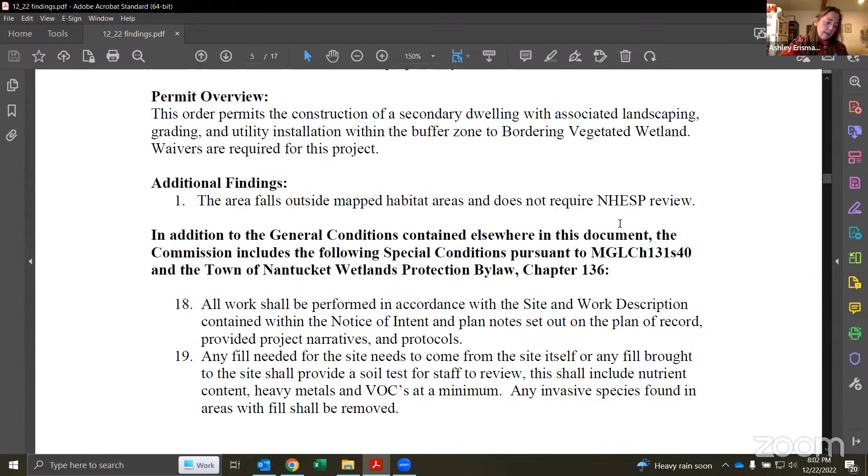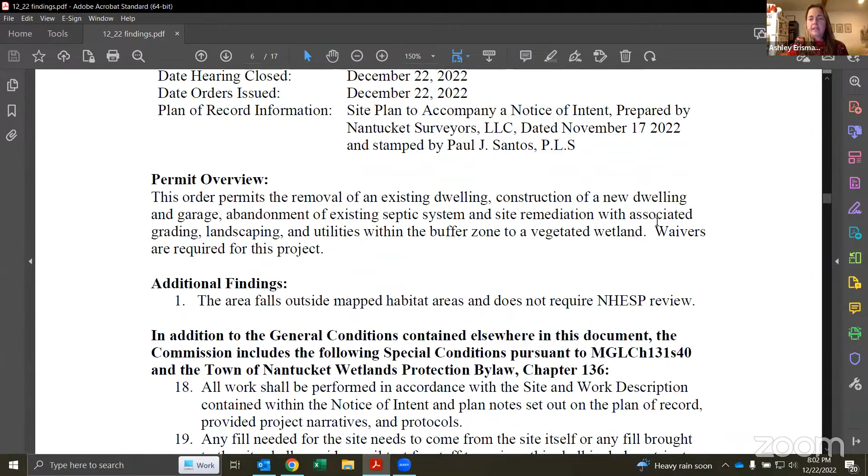And that moves us to the trustees of Eel Point Road, I believe, at 77 Hummock Pond Road. Did we close that one? Yes, and Paul said he'd come back in with an amendment when they figure out exactly where those buildings are going to be. Yeah, that's right, he was going to tighten it up later on.

So I think we need a condition here about native revegetation after that debris removal. And I guess, maybe they should submit a report after the debris removal, and is there any merit in asking for a landscape plan? I mean, the area is a general disaster right now, so maybe they come in with - again, I'm confident this is going to come in with an amendment anyway - but after they do their initial cleanup, maybe come back with a revegetation plan.

I like that, yeah, that's a better word for it. Thank you. So do we want to condition it to show a revegetation plan? I think we need something to identify that we need to address what's coming back, or maybe they just come in with a monitoring report assessing the health of the native vegetation and any need for replanting. And would that be - to have all the details, would an annual report be something we'd want? Well, in this case, it wouldn't necessarily need to be done - like the initial one wouldn't need to be, because it's just after they do that cleanup.

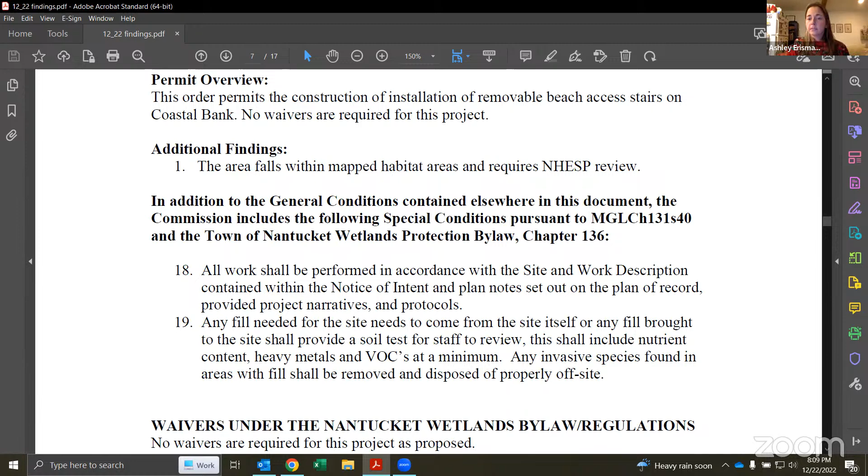And that moves us on to JFM Cacique at 36 Easton Street.

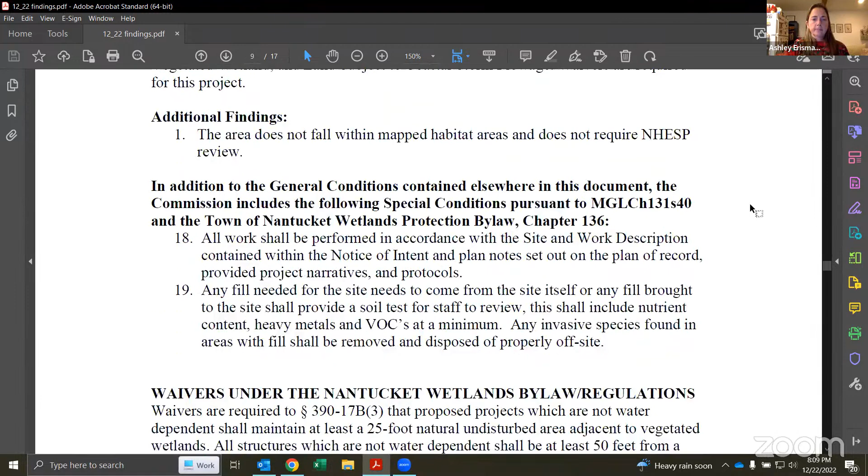Was the garage, wasn't it? Yes. Yes. So this was that garage, 18 and 19, with it written as it is supposed to be.

Yeah, sorry, a lot going on here. Unfortunately I feel like you're referring to my brain right now, Linda. I'm all in with you, just waiting to move my Christmas tree in from the laundry room, where it's been for a week, into the living room.

So this garage seemed pretty straightforward in the way the application was written. I don't know that we need any special conditions. So if there aren't any questions, comments, or amendments, would somebody like to make a motion to issue as drafted?

Motion to issue as drafted made by Mike, seconded by Linda. By roll vote: Beale, aye. Erisman, aye. Misurelli, aye. Landowski, aye. Williams, aye. That carries unanimously, and that brings us to Nantucket Islands Land Bank at 40 Western Ave.

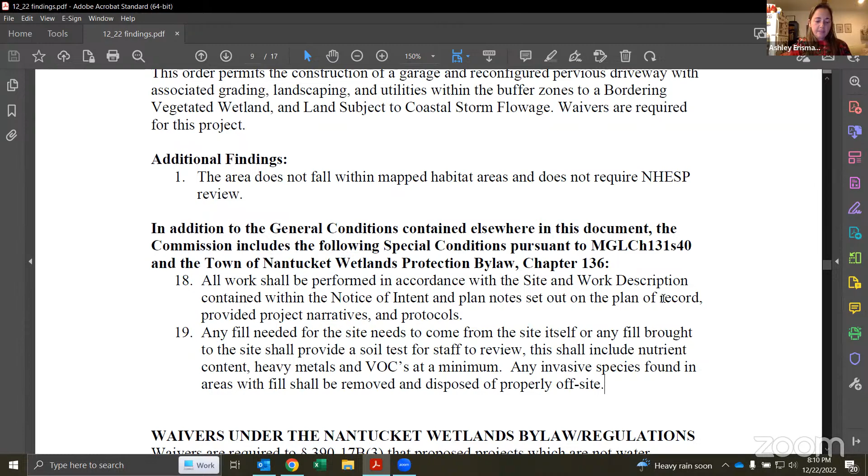The stairs thing again, another set of beach stairs, and we'll add the signs. This was the one with the divergent paths. The sign can even just be a seasonal sign to direct where the stairs are that season, as needed, depending on the location. They normally had to put plover signage out there. There might not be beach for that anymore, but it could be low profile, similar to some of those.

Any other amendments on this one besides the signage and the seasonal removal of the stairs? If not, would somebody like to make a motion to issue as amended?

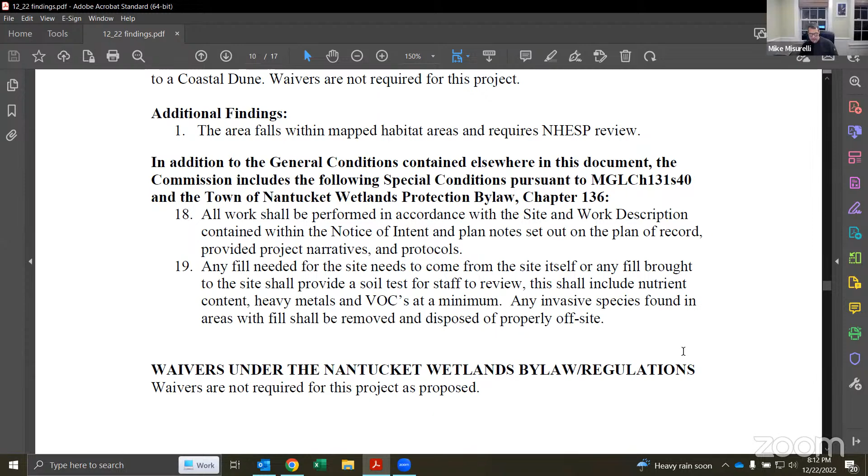So moved, Madam Chair, given to Joe, seconded by Linda. By roll vote: Beale, aye. Erisman, aye. Misurelli, aye. Landowski, aye. Williams, aye. That carries unanimously.

That moves us on to 37 Sankaty Road - Sankaty Head Road, excuse me. That was easy. They're coming back, and they're coming back away from the bluff.

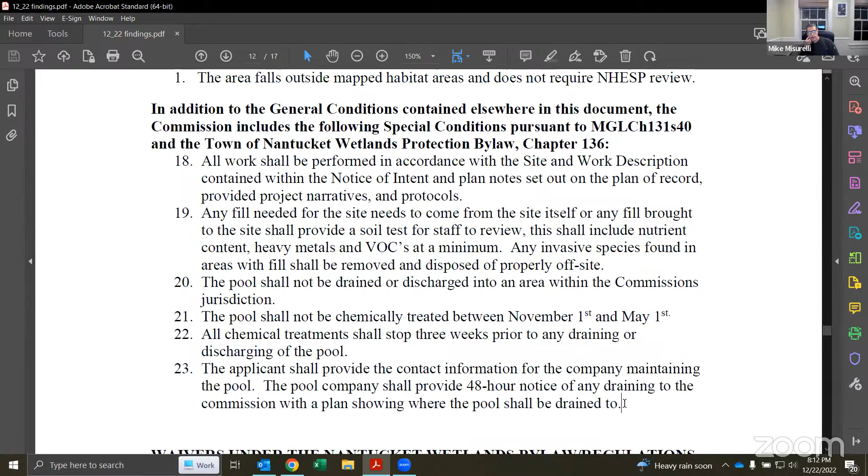The added conditions are basically the pool conditions. What about the revegetation of the area where they were? That should be added in. Yeah, there's gonna be a lot of work on that site - they're gonna disturb a lot of it moving forward.

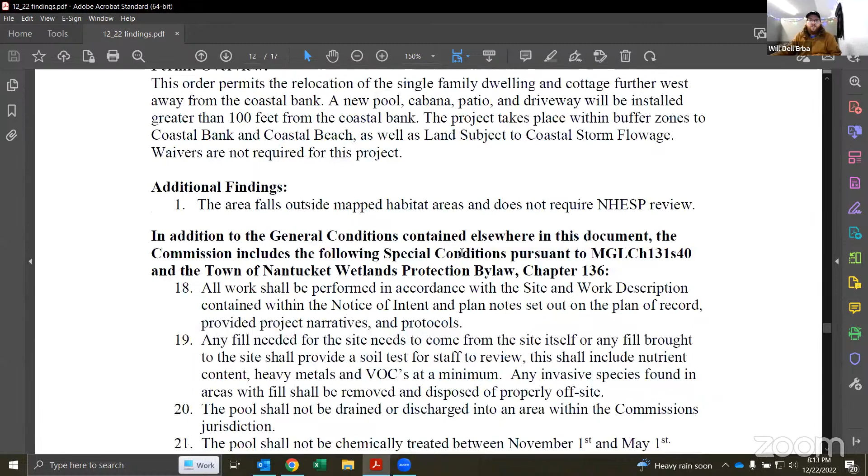So maybe a monitoring report on this one demonstrating revegetation, because some of that's within the 25-foot buffer, if I'm remembering correctly. I can bring that plan up again if you want to see it. I don't think we need the plan, but what about a revegetation plan so we can see what area they're gonna disturb?

So the applicant shall provide a revegetation plan once structures have been moved, or when they figure one out, and a monitoring agreement for the area where they've been moved from, because they're gonna have to fill in the foundations. They were on full foundations. They said they were gonna use material from the site, so hopefully they can shuffle that around.

They said it'll give us the opportunity to weigh in where we want some beach grass and stuff. I think that's good because we'd want them to be native species, et cetera. Right, and they said they were gonna use them. All right, so that condition will be added: applicant shall provide a revegetation plan and monitoring once structures are moved.

Any other? They're not gonna want a sand pit up there anyway. That would not do well for the health of that bluff that they're atop of. Definitely not. Any other questions, comments, or amendments?

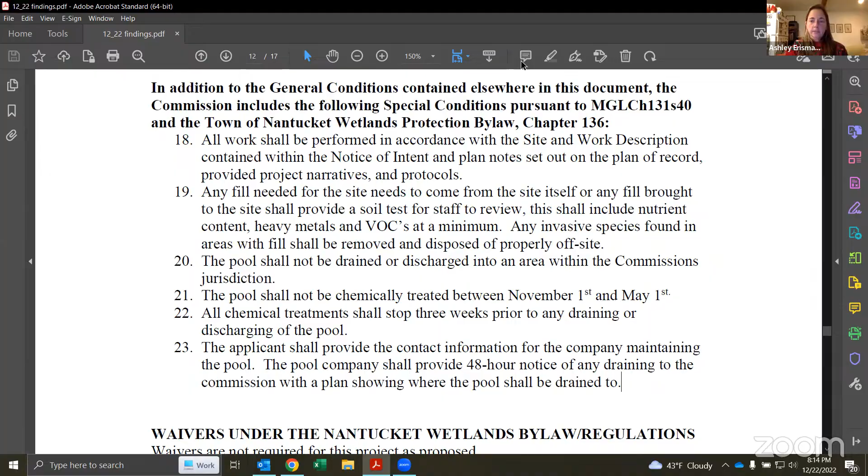If not, would somebody like to make a motion to issue as amended? So moved, Madam Chair, seconded by Mike. By roll vote: Beale, aye. Erisman, aye. Misurelli, aye. Landowski, aye. Williams, aye. That carries unanimously.

We are done with orders. I feel like I'm losing my voice. There you go. We have no extensions of orders, so this moves us on to other business.

Approval of minutes from December 1st and December 15th. Does anybody have any concerns? I guess we'll go through December 1st first. If there's no comments or amendments about the minutes, would somebody like to make a motion to issue as drafted?

Motion made, so moved, seconded. By roll vote: Beale, aye. Erisman, aye. Misurelli, aye. Landowski, aye. Williams, aye. Carries unanimously. And then we have December 15th minutes.

If there are no questions, comments, or amendments about those, would somebody like to make a motion to issue as drafted? Motion made by Mark, seconded. By roll vote: Beale, aye. Erisman, aye. Misurelli, aye. Landowski, aye. Williams, aye. That carries unanimously, and thank you, Terry, for always keeping such fabulous minutes for us.

I know you were threatening retirement at one point. That was going to be coming soon, and I hope it's not.